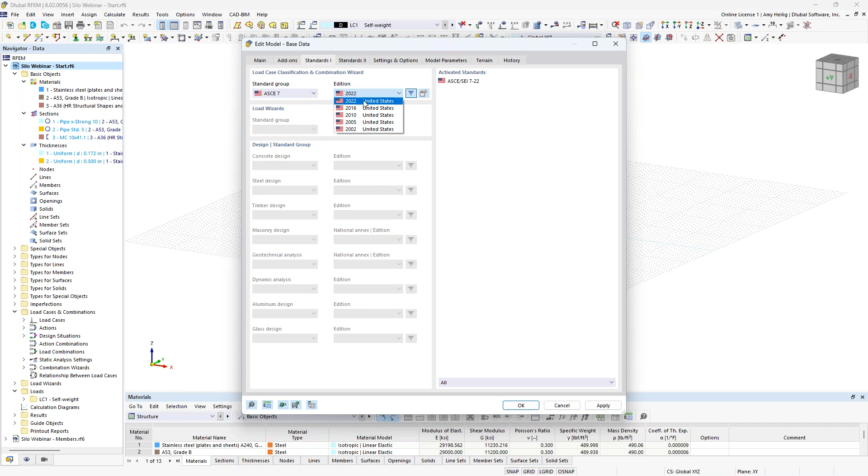Now, I will be generating the load combinations automatically according to the ASCE 7. You do see here many other international standards available, and we have implemented the 2022 for our load combinations. So we'll go ahead and implement that latest version there, again, for today's load combinations. So once this information is defined, you'll be brought into the main program here.

And I've taken the liberty for the sake of time to define some various materials such as stainless steel, A240, grade 304, we have A53, A36, and these all just come from our material library within RFEM itself. Also some various cross sections such as some pipe shapes, MC shapes, directly from the AISC database, and then a couple of thicknesses that have already been defined, and these will come into play when we draw our surface elements.

So to begin, I'm going to modify the location of this drawing grid, and I can do so by right-clicking at the bottom of the page here under Grid to edit, and to simply modify the origin coordinates to 61 feet in height. So when I click OK, we'll notice that my drawing grid is now located at this elevation.

I'll start off by drawing a new circular line element. So I go ahead and select a new line, but I change the line type here to circle, where I can simply snap to that origin point. And then I can either snap to my drawing grid here, or I could directly type in the radius of 1.5 feet. I hit enter on my keyboard, and we have that initial line element generated.

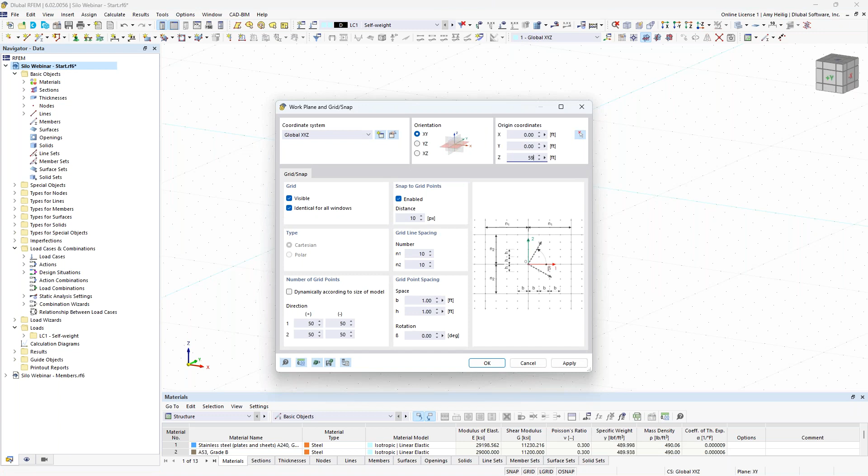I'm going to modify my grid elevation once again by editing it here, and we'll go ahead and set the elevation at 59.25 feet, and we hit enter. So now that grid is just sitting slightly below that line element that we just created with that circle.

I will create a new line. This time the line type will stay as a single line where I snap to that circle point, and then I'm going to also snap to my second point down here on the drawing grid at 7, 0, 59.25. I right-click to exit this dialog box, and we're going to go ahead and create a couple nodes.

So we can do so right up here in our quick tools up at the top to generate a new node. Now I could either snap to a point again on my drawing grid, or I could input in the coordinates directly at 7.17, 0, and 59.17. I hit enter on my keyboard, and we see that first node generated here off to the right.

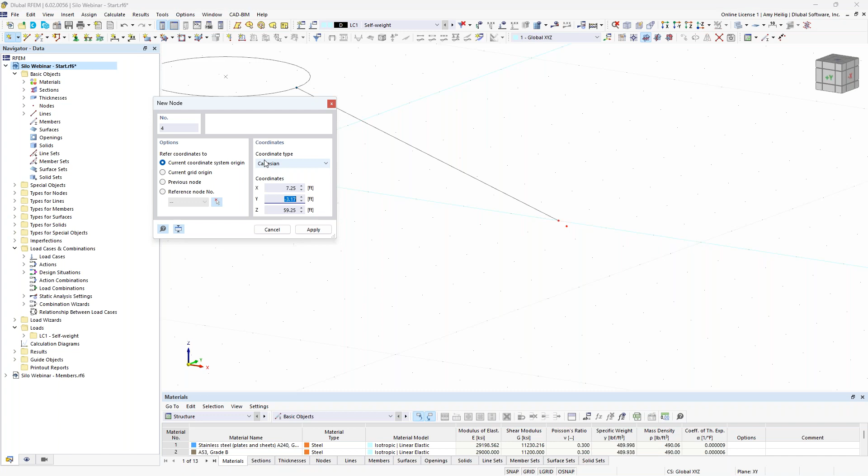I'll go ahead and create a second node at 7.25, 0, and 59.25 feet in elevation. I hit enter and right click out of this dialog box. This is going to form the curvature of our roof surfaces here for our silo.

We need to connect these nodes with another line element, but this time the line type will be arc. With this line type selected, we simply choose these 3 nodes in order. We right click and now that line is complete.

I'm going to take both the straight line and the arc line and select them with my selection box shown here graphically. We want to take advantage of our copy rotate tool. I'm going to create 2 copies here at 180 degrees, and we'll rotate about the center origin point 0, 0, 0.

Under the numbering and options, we can take this further by activating step links. This brings up a new tab in this dialog box where I can generate surfaces between my copied lines. When we do this, we can create a new template.

In the new template options, we simply assign a thickness and a material to those surfaces that will be generated. So utilizing the thickness I've already defined in this model at 0.172 inches within my dropdown, we'll assign it the stainless steel material as well.

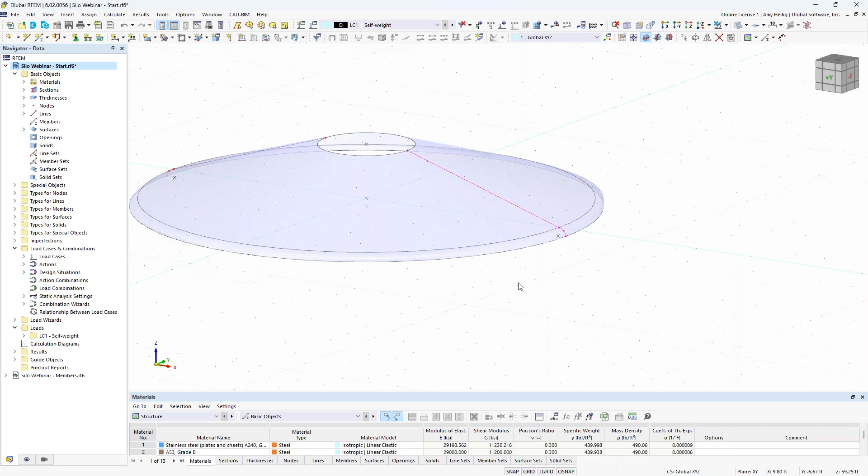When I click OK, I change the link type to arc. I click OK once again, and now we see those surfaces generated for our roof structure.

Now that those have been generated, we have our opening up here at the top. I'm going to hold down my control key to select both of these line elements, and if we right click under these menu options, we have the ability to extrude the line into a surface.

This is certainly a time-saving option rather than manually creating this surface, as we can take the existing line and extrude it 1 foot in the vertical positive Z direction, based on those global axes here.

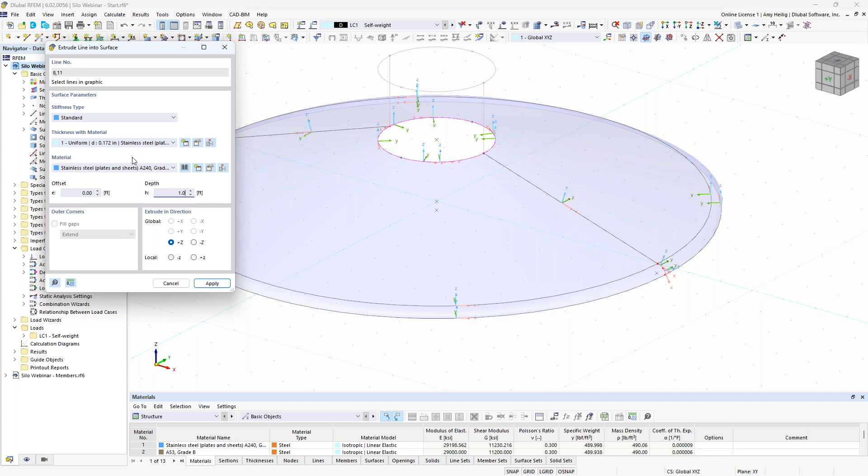Once again, we want to assign a thickness and a material to this newly generated surface. We could certainly create a new thickness here, or open up our material library to assign a new material, but these have already been defined in our model at 0.172 inches and stainless steel. We click apply, and now we see that surface generated here.

This is fairly straightforward for the opening at the top, but what if we'd like to add an additional opening to this more complex curved quadrangle surface here? We have opening options up here in our quick tools, but the problem is these openings must be applied to surfaces which are all in one plane, and we don't have that with the curvature of our roof here with this individual surface. So how can we add an opening to it?

I'm going to go ahead and move this to a plan view here graphically, so now we're just looking down at the top of these surface elements. I'm going to again create a new line element with the line type set to circle.

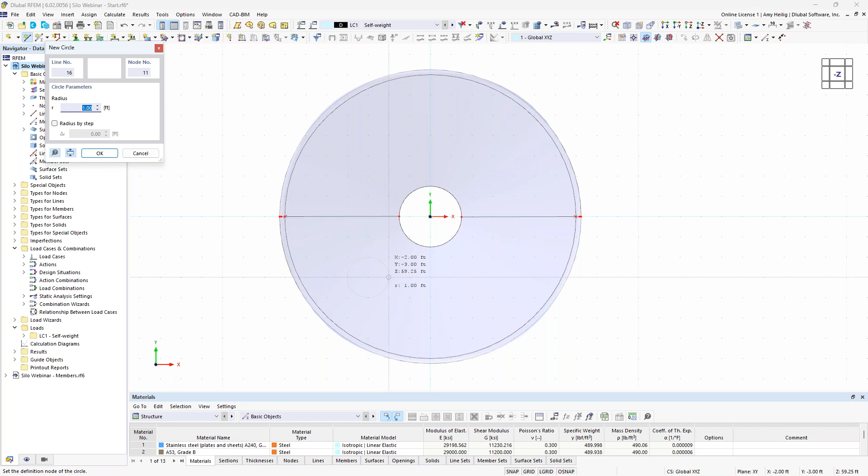And then we would snap to our drawing grid where we would like to place this opening, and I'll go ahead and create my second click here to define the radius of that circle. This is nothing more than a line element that's lying at the same plane as my drawing grid.

What we do now is right click on this line and yet again extrude the line into a surface. This time we'll keep the height at 1 foot in the positive Z direction. We assign the thickness, we assign the material, and we click apply.

Now we have this surface passing up through this curved quadrangle surface. Holding down my control key, I want to select both of these elements that are now intersecting. We right click, and under the right click options, we have the ability to create an intersection between these surfaces. But new within RFEM 6, we can automatically create that opening as well where the intersection takes place.

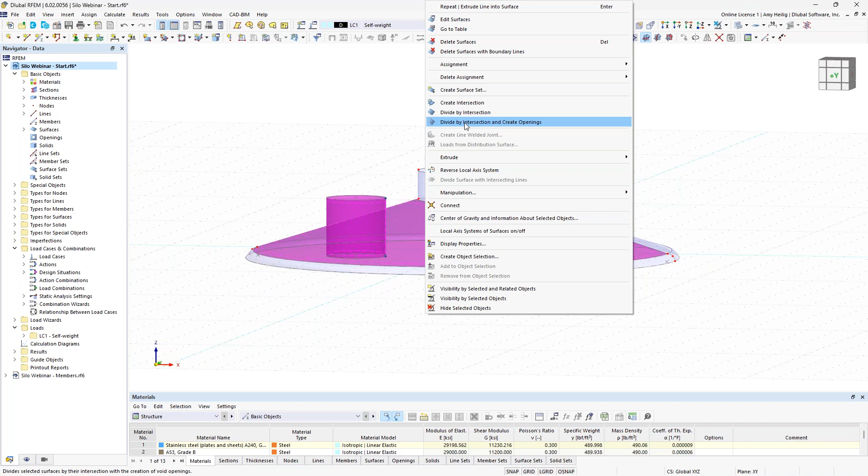So we select that option and automatically see the opening generated here within our curved surface. The program also broke apart this vertical surface into 2 various parts. So if we'd like to delete everything below the curved quadrangle, we can turn this to wireframe view, and I can graphically use my selection options here and simply hit delete on my keyboard.

So now what we're left with is the vertical surface here, the opening, and everything looks as it should be. So now that we're done with the roof surfaces, we want to go ahead and generate the silo walls.

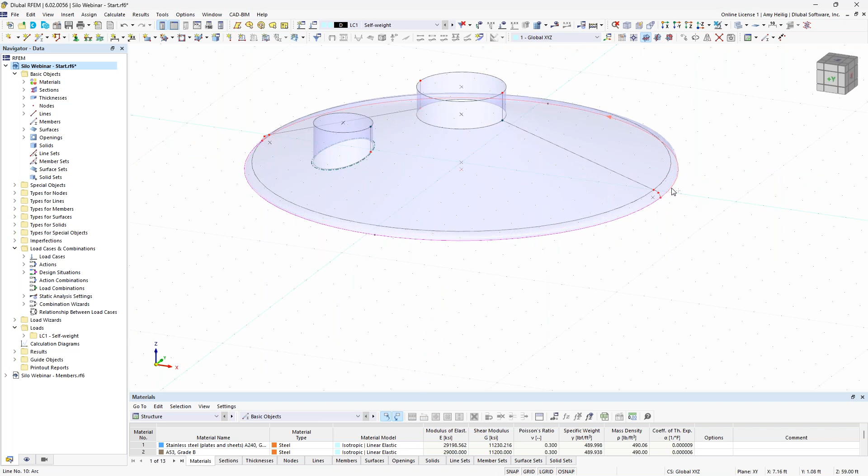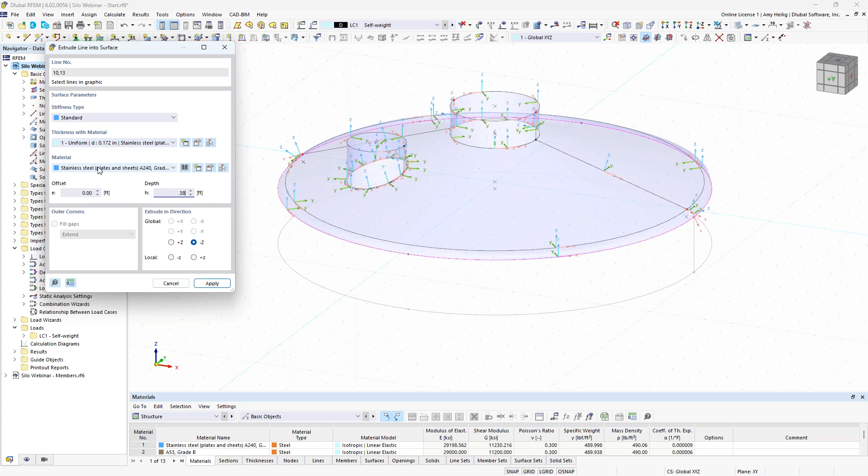I will hold down my control key to select both the front line and the rear line at the base of the roof elements, and we right click to extrude the line into a surface. Rather than extruding into the positive z-axis, we want to modify this to the negative z-axis, and we're going to give it a height of 38 feet. Once again, we assign the thickness and material. I'm going to keep this the same as all the other surfaces so far, and hit apply. So now we start to see the silo walls begin to build here.

Now I'm going to create a couple transition points at the base of this structure and continue to increase the height of these silo walls. I'm going to modify this extrusion depth to 3.5 feet, and click graphically on these bottom two lines. I hit apply, and create one more transition point at 1.5 feet, again clicking on these bottom lines. I hit apply, and now our silo walls are complete. These transitions will make more sense as we continue to model.

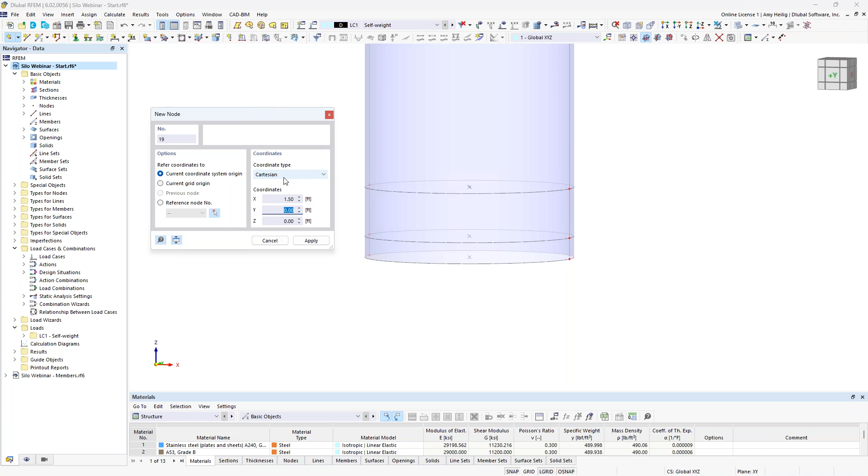So we're now done with the majority of the silo structure itself, other than the hopper. We want to create a new node, so we go up here to draw a new node, and I can directly input the coordinate points of 1.5, 0, and 5.5. I hit enter, and we should see a node generated down here at the bottom. Now I right click to exit, and we want to draw in a new straight line element, similar to before with just a single line. I'm going to snap to the second point here on my silo walls down to this newly generated node, and right click to exit a couple times.

I'm going to highlight this single straight line element and take advantage again of the copy rotate tool. The program remembers I previously created two copies, 180 degrees. We're still going to take advantage of the step links here. If I wanted my hopper to have an increased thickness or a different material, we could set that information here, but I'm going to use the same information I've already defined. So when we copy and rotate those lines, we'll have those surfaces automatically generated here.

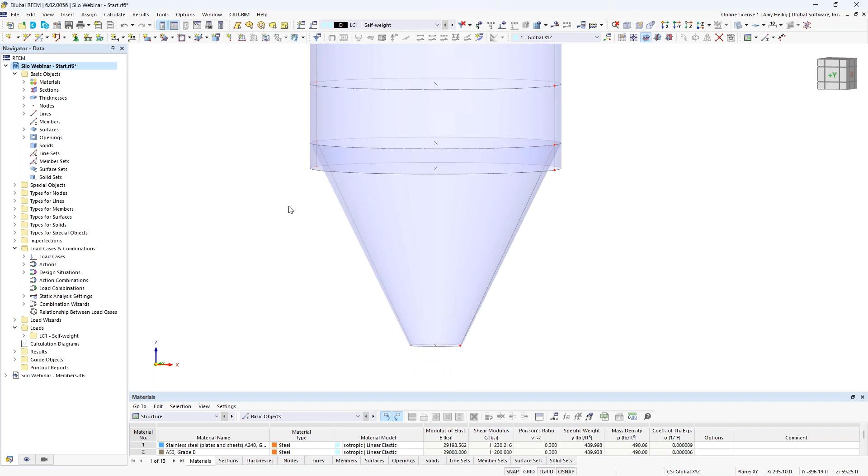Let us talk about the ring beams. Ring beams, in our case today, will be used to transition from these 1D steel members supporting the silo structure into the 2D surfaces here. But ring beams also act as wind girders for additional lateral stiffness, so it all just depends on the silo structure that we have. I'm going to create a user-defined visibility by first selecting this line element in the center.

Then I'm going to hold down my control key to select this additional line element at the bottom. I'm going to create a visibility by the selected objects, and highlight these two top line elements. When I right-click, under the options we have the ability for manipulation and several tools available, including parallel lines. This might be similar to what you see in AutoCAD, where we can simply input the offset distance such as 6 inches or 0.5 feet, and then offset it based on the line's local axes. We can see here currently it's set to negative y.

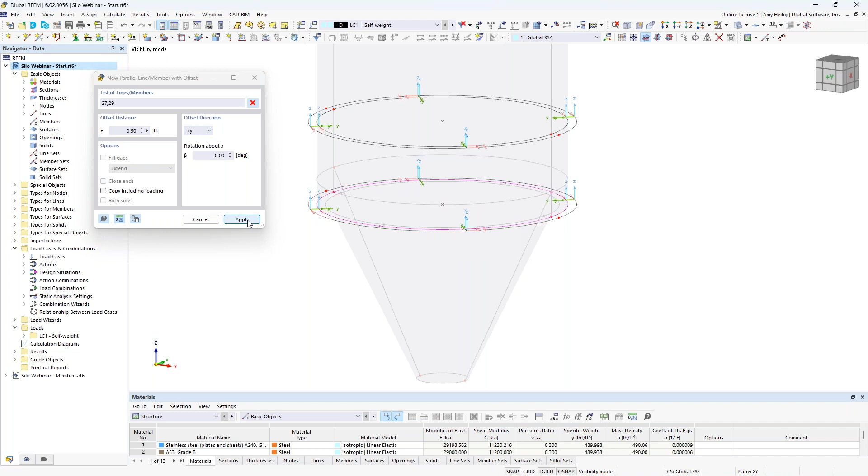So we're going to offset that 6 inches from the existing line's y axis in the negative direction. I hit apply, and do the same thing at the base line here. I hit apply, and then I'd like to create one more offset in the opposite direction at the base of these wall elements, so I modify this offset direction to positive y instead, and graphically click on those lines. Hit apply, and right click to exit out. Now we have the existing boundary lines, which will be used for those ring beam surfaces.

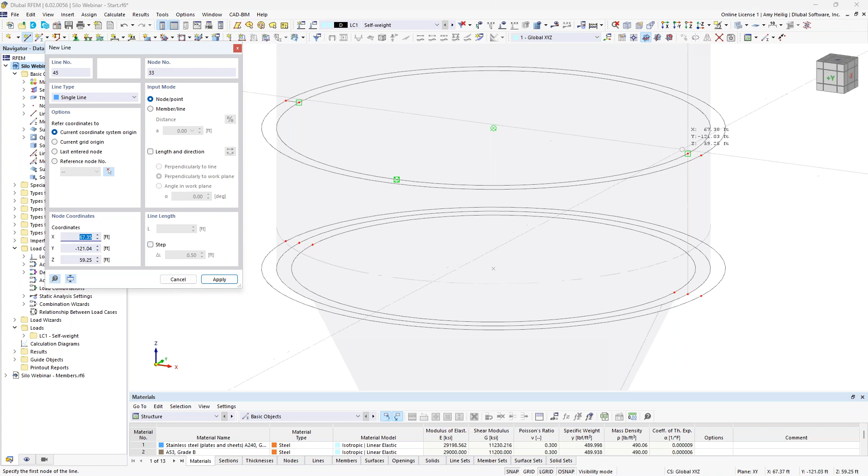I want to connect these nodes with a new line element, so we go back to the general single line. I will click on the left node, then the right node, and right click once to exit. I'll do the same thing on the right hand side, and then create a single continuous line at the lower left and also at the lower right.

So now that these boundary lines are created, we need to actually define the surfaces here that will make up that ring beam. So we can create a new surface type up here in my drop down, but we'll choose the option select boundary lines.

Because those boundary lines already exist, we can just simply put in the thickness, but this time for my ring beam, I'm going to increase the thickness to 0.5 inches. That's already defined here within my model, but we could create a new thickness directly within this dialog box as well. The material, perhaps we could modify this to A36, again available here in my dropdown.

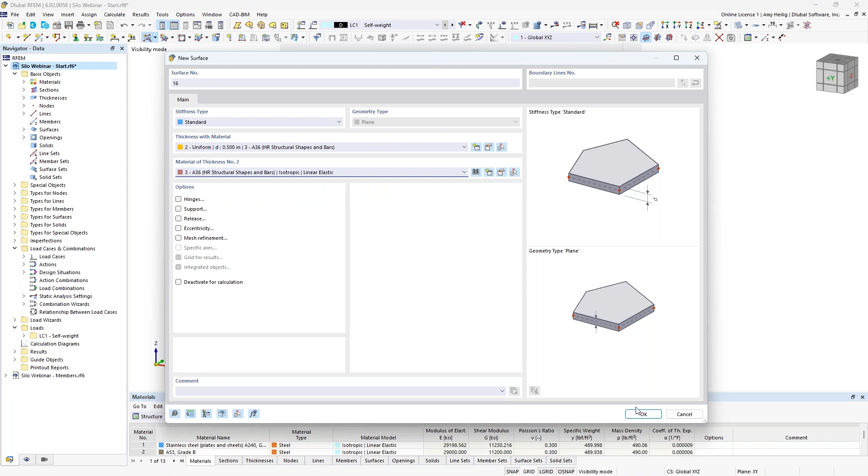I click OK, and then what I need to do next is to select the boundary lines. So I'll select the 4 boundary lines to create the first half of that ring beam, and then we'll do the exact same workflow here for the back side of that ring beam.

Same concept down here for our lower ring beam, but this time the boundary lines will be a little bit larger. And then we'll go ahead and do the same thing at the rear of the structure. So once we close those boundary lines, those surfaces are now generated and we can right click to exit.

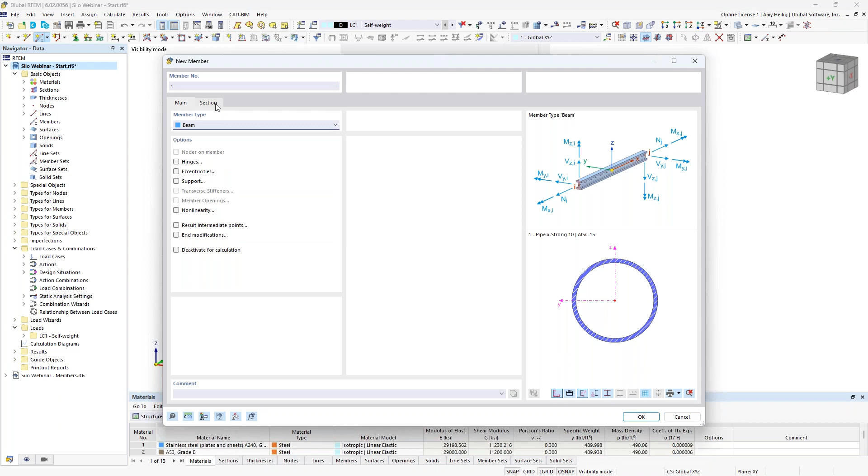So what we'd like to do now is to generate the members here that are supporting the structure down to the foundation. And we would normally do so by drawing a new single member, setting the member type here under the second tab, defining the cross section, and defining the material. But for the sake of time, I went ahead and have done this workflow in an already saved model.

So we'll go ahead and jump to this already saved model where all of these members have already been defined. So let us just take a quick review of what exactly the member types are, as well as the cross sections.

Under our navigator options, and specifically the second tab for our display properties, I can scroll all the way to the bottom to take a look at the colors shown here graphically, and I could change these based on the member cross section.

So what this is showing me now are the various cross sections that I have defined. You'll notice for these main columns here, these have been defined as a pipe extra strong, 10-inch diameter, A53 grade B material. Now we have some smaller pipe elements here for our lateral stability as well as their horizontal members.

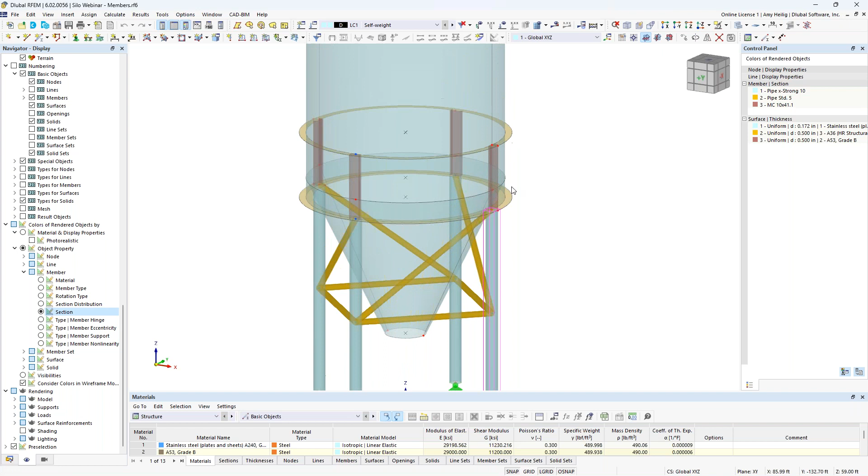These are just standard pipes, 5 inches in diameter. And finally, up here at the top, spanning between the 2 ring beams, I have some MC shapes, again directly from the AISC database within the program. They're just providing additional stiffness here between the transition of my silo walls to my hopper.

So that covers the basic cross sections that are used, but I'm going to modify the view now to the member type. So now we have these various colors here based on the member type. And what I mean by this is if I double click on one of those main columns, you'll notice that the member type is set to beam.

So a beam is just anything that's a standard column or beam. By default, the member is considered fully fixed at either end unless we add in a hinge option here to release the moment, for example. But we'll leave everything fully fixed here.

We also have these purple members, and the purple diagonal members are set to the member type tension only. This means that these members can only take tension forces. The minute that they have a compression force, they'll be taken out of the calculation entirely. But because RFEM is a nonlinear analysis program, in a subsequent iteration, if tension forces are reintroduced, then we can also reactivate that member.

And finally, we have this green member in the back, which you'll notice is a different color than the rest of our columns. So what's interesting about this member is we actually just released it in RFEM 6, and it's of the member type surface model.

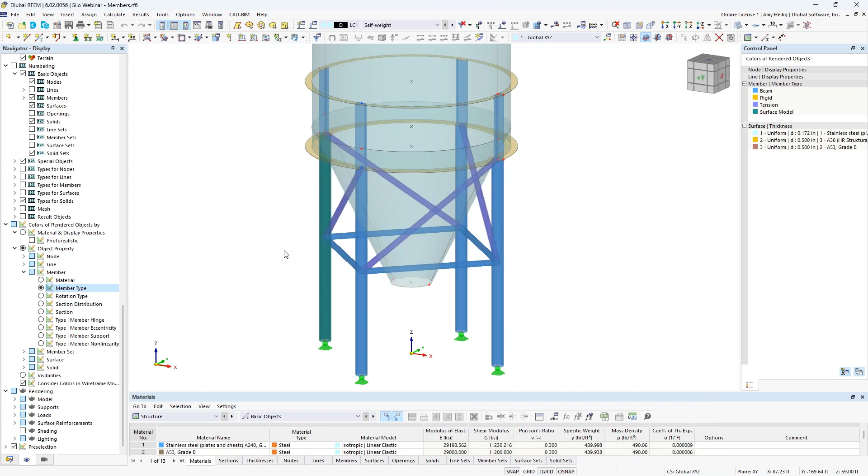Now, at first glance within this dialog box, it really doesn't seem too much different than a standard beam element. You'll notice under the section, we still define this as the extra strong pipe, A53 grade B material. But this will definitely come into play later on when we take a look at the FE mesh as well as our results. So I'll explain this member type in more detail as we go on, but just notice now it is slightly different than the rest of our column elements.

I also have placed in here some nodal supports at the base of our columns. These are just applied here directly within our quick tools.

Okay, so now that we have discussed the member modeling and have done a quick overview, let us talk about these surfaces and the importance of local axes orientation.

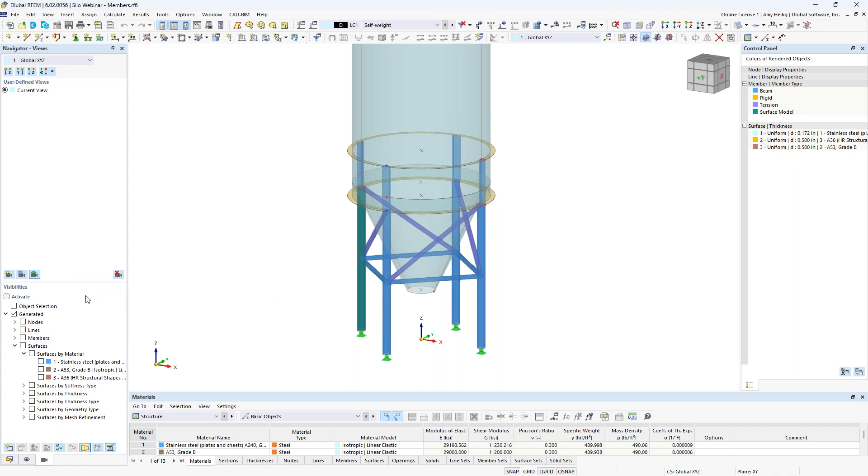In our navigator, we're going to jump to this third tab here, which allows me to turn on and off various elements within the model. I'll begin by turning on my surfaces, only the stainless steel surfaces, so everything else is hidden in the background. I'm going to right click to turn on the local axes of these surfaces.

If you notice, these local axes are right now oriented in various directions. They're certainly not all going in the same direction. This is a problem, and it's incredibly important when we're doing any FEA of surfaces that we ensure the local axes are oriented in the same direction, for a couple different reasons.

The first is for loading considerations. Much of the loading that will apply to this structure today is based on the local axes. For example, if we have the z-axis facing inward for some of these surfaces but facing outward for others, that's going to affect our ease of applying loads.

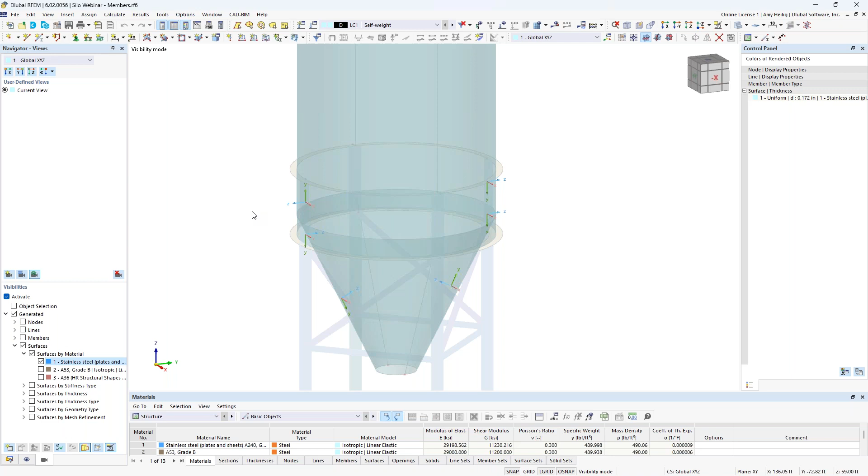The second issue is result interpretation. Information once we run the analysis, such as surface internal forces and stresses, is all based on local axes. Again, if we have adjacent surfaces with varying axes directions, then our results are also not going to make much sense. So let us begin with the local z-axes.

Currently, most of these surfaces here, with the exception of our hopper and this surface in the lower left, are all facing outward.

We can modify these by selecting them and holding down our control key, then right click to simply reverse the local axis system. Now you'll notice that the z-axis is facing out for all of our surfaces. So this is certainly a good start.

But the next problem is, if we take a look at these larger wall surfaces, we have the y-axis facing upward here on the left and facing downward here on the right. And the same goes for some of these other various surfaces.

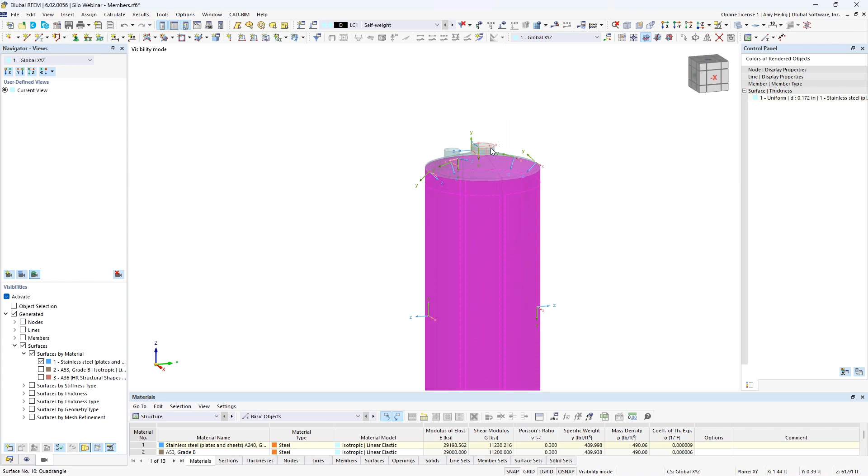So I'm actually going to highlight all of my vertical surfaces, including the hopper, as well as these surfaces up here at the top, by holding down my control key. Now I can easily double click on these surfaces to jump into the edit surface dialog box, and we want to turn on the specific axes option.

This brings up a new tab at the top of this dialog box called input axes, and under this dropdown we want to select the option axes parallel to lines. This allows me to tell the program to orient all selected surfaces and their y-axes parallel to a line that I can just arbitrarily choose within the model.

So I can graphically select any line back here within the model. We'll go ahead and turn on our visibility of our lines, and choose this line element here, number 49, for example. Notice when I hover over it, the red arrow is showing me the line orientation from bottom to top, because that will affect how we orient our local y-axes.

So I select this line number 49, I click OK through these dialog boxes, and now you'll notice that all of my local y-axes are now oriented in the vertical direction. So this takes care of those vertical surfaces, but we need to address the roof surfaces here as well.

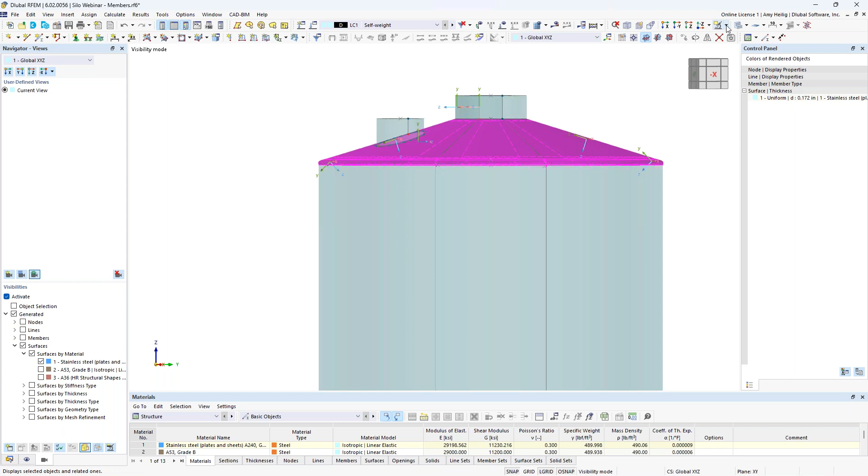So I will select the smaller surfaces that define that curvature, as well as my two quadrangle surfaces. I'm going to create a visibility by the selected objects, and you'll notice the first problem we have is all the z-axes are facing inward.

So we select all of these elements here, we can right click, and under our surface option we have the ability to reverse the local axis system. Now all these z-axes are pointing outward, similar to the rest of the surfaces within the model.

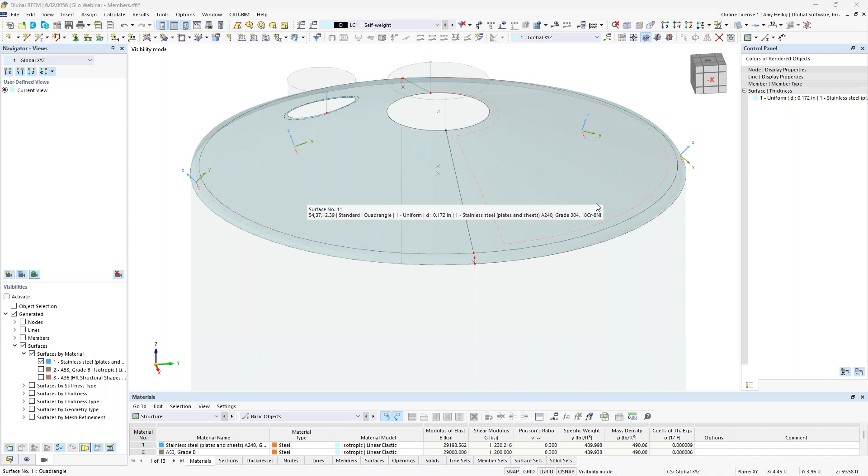The next problem though is the y-axes. So for these, I'm actually going to select all of them, double click, and once again under the specific axes and input axes options, I'm going to use my dropdown to choose the option axes directed to point.

So I can tell the program, instead of setting these parallel to a line, I'm going to set the local axes, the local y-axes, directed to a point that is passing up through the center of my silo structure. So I can graphically choose this axis that I would like to point these local y-axes to my surfaces. Sorry, I can directly choose the coordinate points is what I mean.

Or I can just simply type in some type of arbitrary vector. So 0, 0, 0 and 0, 0, 1 is enough to orient those y-axes towards the center of the structure. This way, when I click OK, you'll notice now that each y-axis is pointing right here towards that center point.

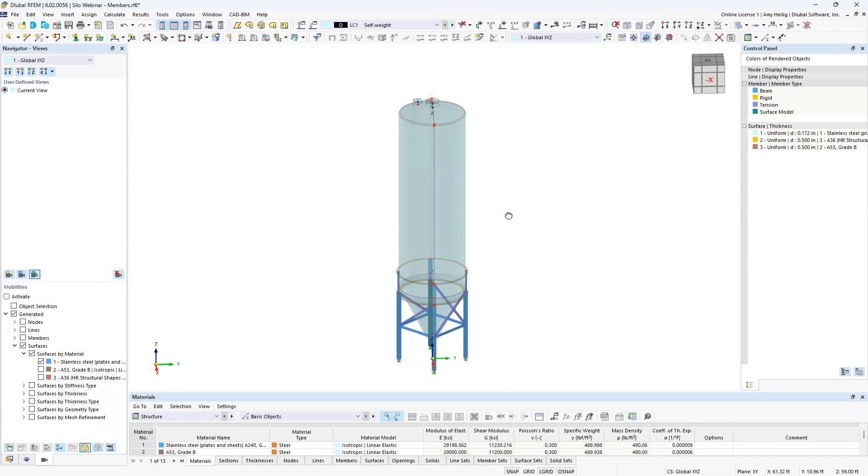Okay, so now that we have modified all of the local axes systems, we can go ahead and cancel our visibility mode. And the next thing we'd like to talk about before running an analysis is our FE mesh. So if we go to calculate mesh settings, we will see here our target length for finite element. So this is our global mesh settings, and the default is set to 1 foot. If I click OK and apply, the program will go ahead and generate this mesh for me.

Now, under my navigator display options, it could be that your mesh is turned off. So all we need to do here is to turn that back on. I'll turn this to wireframe view, and you can see that the program has automatically meshed everything for us based on that 1 foot setting, including tying all the members into the mesh. Everything again is done automatically.

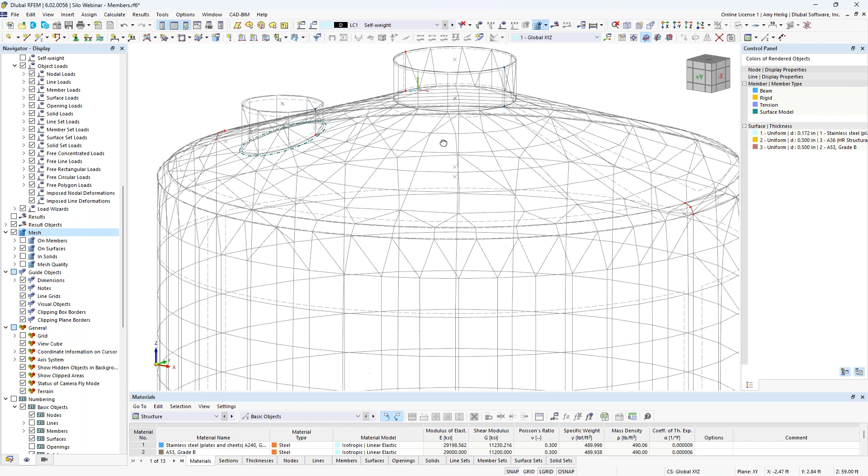But the problem is that this mesh is a little bit too coarse. For example, if we look at these smaller vertical surfaces here at the openings, there certainly are not enough FE mesh elements along the height, so we'd probably want to refine that further. One option is just to go back to the mesh settings here. We could certainly set this at a smaller value of 0.5 feet. We can hit OK and apply.

And now you'll notice that we have additional FE mesh elements. Looks a little bit more refined everywhere in the structure. Now, for my example today, I am going to keep this at the more coarse mesh size of 1.0 foot, and that's just simply to get a quicker calculation. But for your own projects, you certainly would want to refine that further.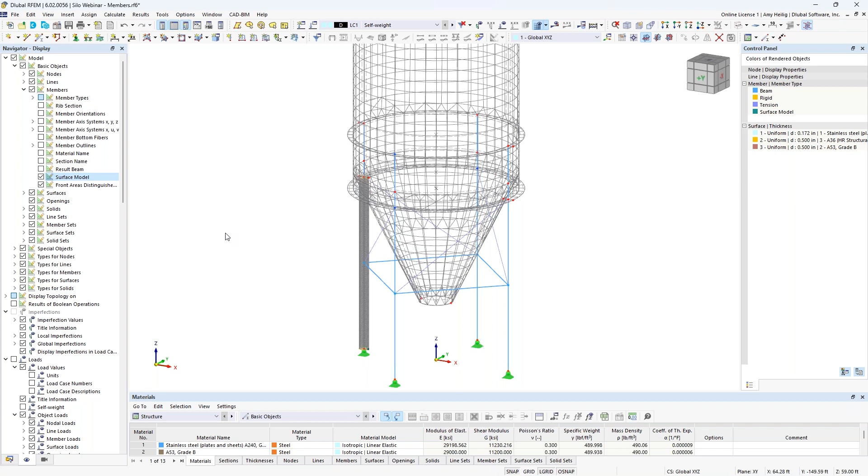Now, remember back to this special member type here, surface model, and that it's a different member type than the rest of our columns. Well, we'll actually be able to see that now if I scroll up to my navigator display options to the top under the members tree, we have here a checkbox for surface model. So when I turn this on, notice that we have an FE mesh generated for this column element.

So what's happening here is that the program has created the 1D member element, as we see with the rest of the columns, that we can move forward with the AISC design and the steel design add-on a little bit later on, but it's also creating a secondary element here for the surface. And this surface will allow me to perform a more in-depth stress analysis and design, for example.

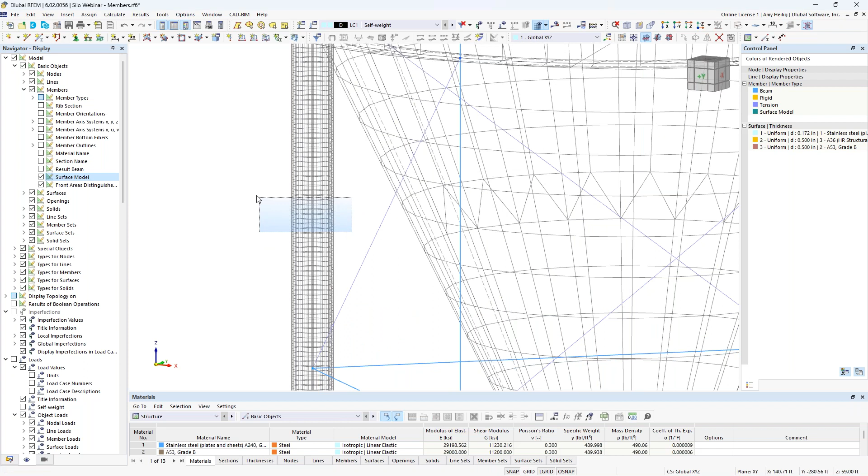You'll also notice that the FE mesh is much more refined than the rest of the structure. So if I go ahead and highlight this surface and take a look at the dialog box here, the mesh refinement is activated for this specific surface. And under the mesh refinement, we can see here that the program has automatically detected that we're going to have to set a smaller mesh size of 0.1 feet, but I can always adjust that if I'd like.

And then it will transition into the rest of the surface elements, which have a global mesh setting of 1 foot. So you can certainly apply mesh refinements about nodes, about lines, about specific surfaces, as we see here. You're not confined to only the global mesh settings. But this is an important feature, again, of this surface model member type that we'll take a look at our results once we are able to run that analysis. But just keep that in mind. That's what's going on underneath the hood.

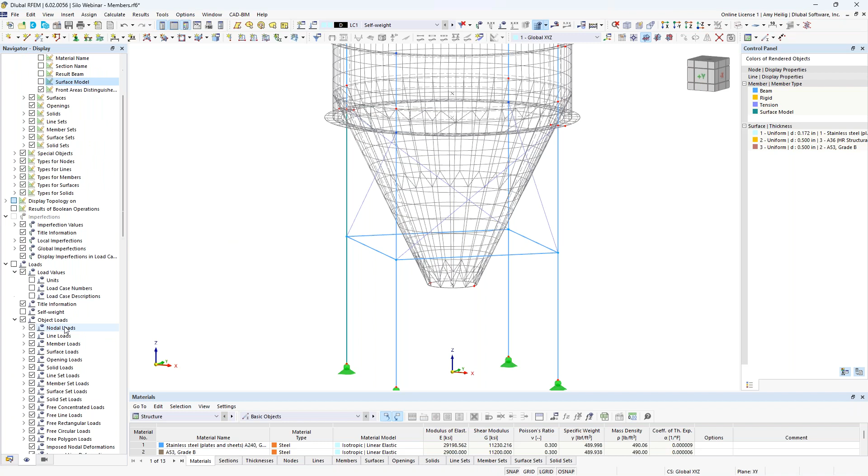Okay, so we're now ready to move on to loading. So I'll go ahead and deactivate the mesh here. And if we go into our load cases and combinations dialog box, remember under the base data, we are generating our load combinations automatically to the ASCE 7, the 2022 standard. The combination wizard, when this is checked on, the program will automatically generate our load combinations referring to the standard. Alternatively, I can just uncheck this if I'd like to manually create my load combinations instead.

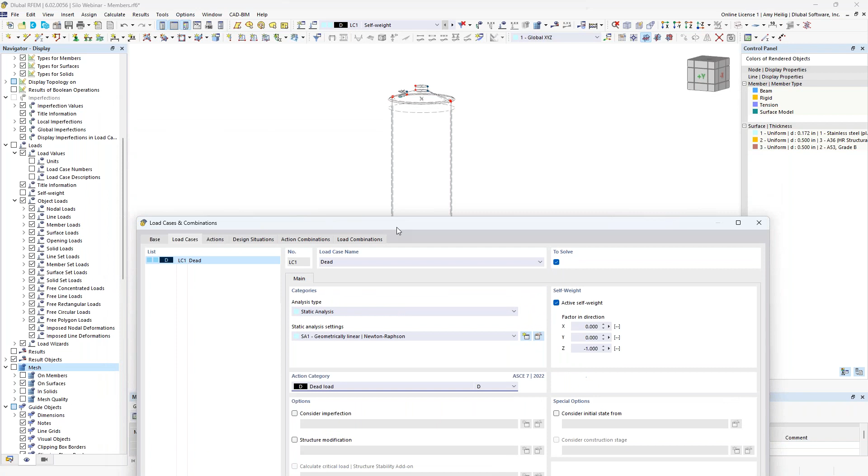Under our load cases, the program creates our first default load case called self-weight. If we'd like, we could rename this one to dead load. We would want to assign the action category here to dead load. This is specific to the ASCE 7, so the program knows which load factors to apply to which load cases. Now for my dead load case, I'm actually not going to apply any additional loads to our structure. We'll go ahead and leave that as self-weight only.

But I will create a second load case, and we're going to call this one pressure horizontal. And this is for our fill load that's going to go inside the silo that's going to create this outward pressure. Now the action category, if this was a fluid load, we could certainly set this to F. For today, I'm going to set this to live load. So now that I've generated this load case, I click OK, and I'm back here within the program, but notice load case 2 is selected within my drop-down box.

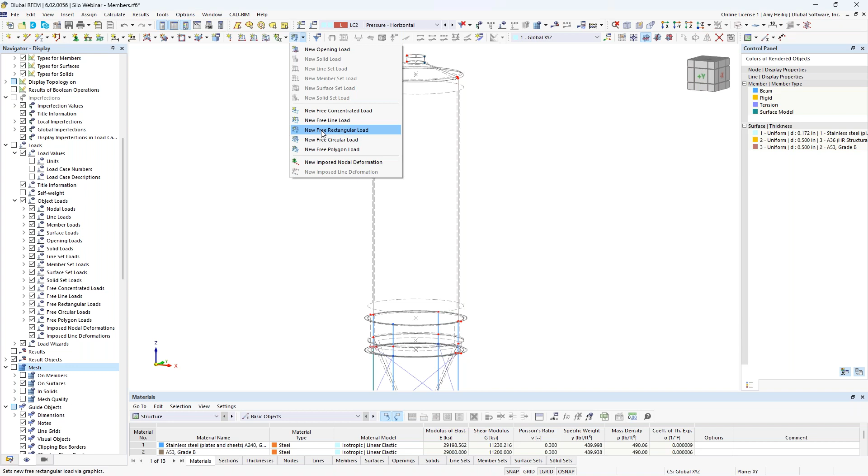Now with this fill load, I am going to assume that I'm not going to fill it up to the full height of the silo walls, up to the very top here, but rather we know this fill will be at a maximum a couple feet below the top of the surface. So I can't simply apply a simple surface load because that will apply it along the full height. So instead, we want to utilize what we call a new free rectangular load. And this just gives us a lot more flexibility with our structure loading.

Within this dialog box, the first thing we want to do is to specify the load projection, and this will be in the XZ plane. We also want to apply the load based on the surface's local Z axes. So again, this is why we oriented all of those local axes in the same direction, because this will make our lives much easier when it comes to loading. The load distribution is going to be linear in the Z direction. So what I mean by this is at the bottom of my silo, where most of that fill is sitting, we want to have a higher pressure of 2.5 kips per square foot. But at the top of the silo walls, we want to linearly transition to a magnitude of 0.

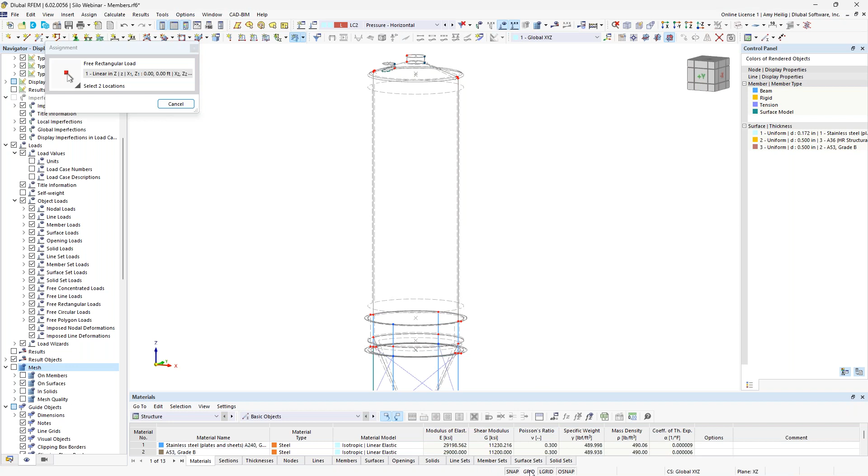So now that we have these load magnitudes defined, we need to actually tell the program where to apply the loads along the structure height. And I'm going to do so by graphically selecting 2 points here. Now, before I select my 2 points, I'm going to turn back on my drawing grid, and notice it's already arranged in the vertical direction here. But I'm going to snap that drawing grid origin right up here to the center of the structure. So we'll choose this point at the base of the silo wall. So if I rotate this around, just notice that that drawing grid is snapped right up to the front face. And I'm going to modify my view here in the Y direction.

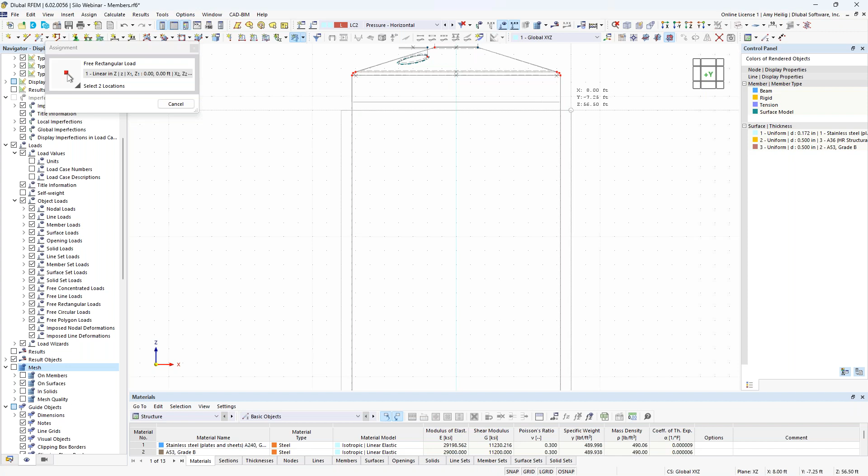So now when I'm applying this pressure fill here, I can choose a point at the base of my wall. And my second point will be to a height of 56.5 feet in elevation. Notice I'm not snapping to a point at the top of my wall element because I know my fill will not be that high. Then I'm going to graphically select the surfaces, the vertical wall surfaces here that I would like to apply this outward pressure. The surface numbers are generated here. I click OK through these dialog boxes, and now we can see that outward pressure applied to the structure.

Now we want to do the same thing down here for our hopper. However, for the hopper, we do want to apply the pressure from the bottom all the way to the top. So instead of using a free rectangular load, it's much easier just to choose a new surface load for this condition. The load type will be set to force. The load distribution will be yet again linear in the Z direction, and we want to apply this based on the surface's local Z axes. The load magnitude here will be set to 0 kips per square foot at the bottom of our hopper, but up at the top, we want to increase that pressure back to 2.5 kips per square foot.

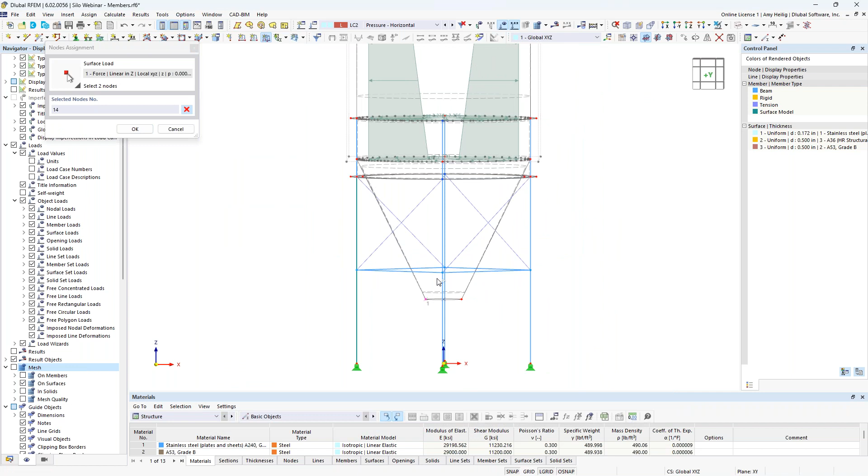Now the program is asking me to select some nodes here to define how this magnitude should vary along the surface height. So I'll simply select the bottom node here for the 0 pressure magnitude, and then my second node point will be at the top of the hopper where I'd like to increase it to 2.5 kips per square foot. I will graphically select here my 2 surfaces, number 8 and number 12. I click OK, and now we have this outward pressure.

If you find that the display of your surfaces is a little bit too big, we can always right-click here under Display Properties, and this will bring us directly to this specific loading under the Display Property controls, where I can modify the size here of 1 KSF to something much smaller. I click OK, and now we can right-click to use our slider options here to increase or decrease the size of this loading. But more or less, we have this outward pressure here at the hopper as well.

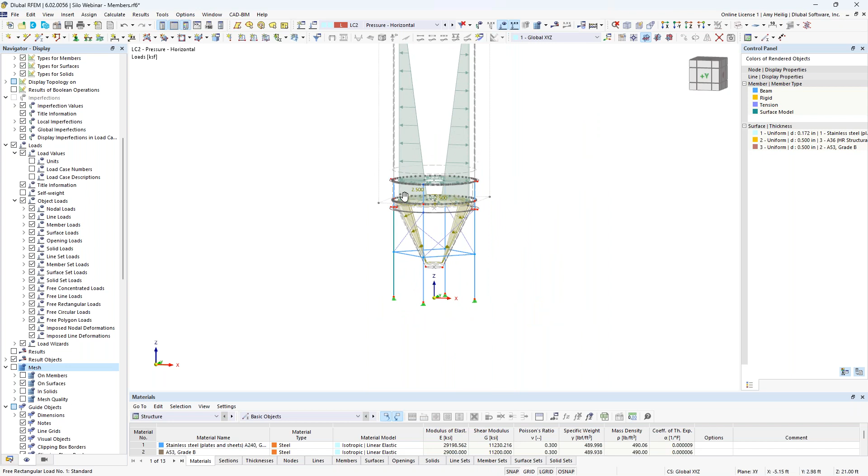So we want to move into our next load case to represent some type of friction load for our fill. We're going to go back to our load cases and combinations, but this time I want to take load case 2 and I'm going to make a direct copy of it. So I now have load case 3, and we'll rename this one to pressure vertical. And I'm going to click OK to come back into the model. But what you'll notice is that now I have load case 3 available to me. And by copying the existing load case 2, I've also copied those loads.

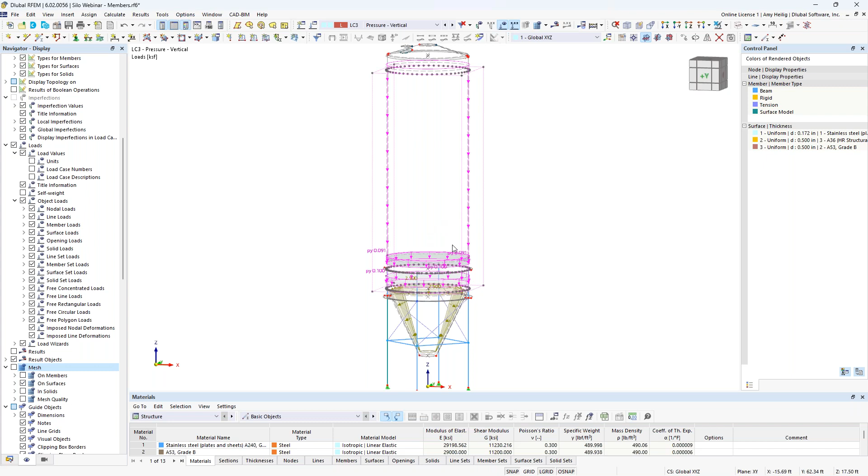So this allows me to double click on this free load. I can modify the load direction. Instead of based on the local Z axes, I'll modify it to the local Y axes. I'm going to also change the magnitude here to negative 0.1 kips per square foot. I click OK, and now that load is automatically modified here. So I don't need to redefine the free rectangular load.

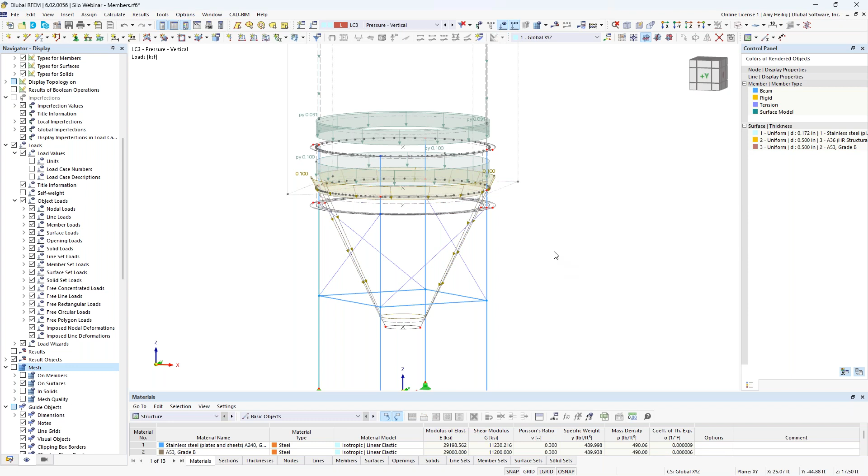I can do the same thing down here for my hopper surfaces. I'm just going to modify the load direction based on the local Y axes. I'm going to modify my load magnitude here to negative 0.1. I click OK, and now that load was also quickly modified. So there's certainly an advantage here of making a copy of that existing load case to not have to redefine those free rectangular loads and surface loads again.

Now, for our final load case, we will just generate a new load case rather than making a copy. And the wind load, this will be of the type wind with the load case name set as so. The action category will, of course, be set to wind load. So now that I have this fourth load case, what I'd like to do is refer here directly to the ASCE 7 2022. And in particular, I'm looking at figure 30.10-1.

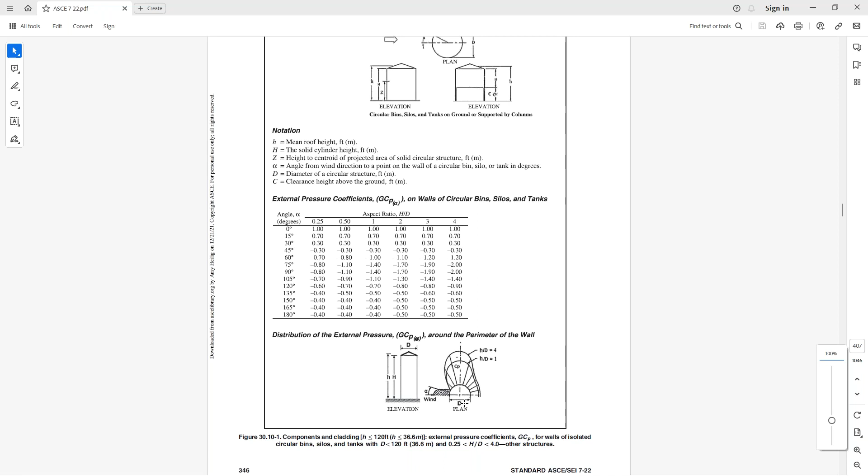So if we are designing our silo according to the components and cladding method for our wind loads, you'll notice here that we have a rather complex scenario where these wind loads will actually vary as we move around the circumference of the structure. Now, how we vary the magnitudes of the wind loads all depend on this table given here with the external pressure coefficients that are further dependent on the height to diameter ratio of our structure. So how do we apply such a complex loading as we see here in figure 30.10-1 and easily do this in RFEM?

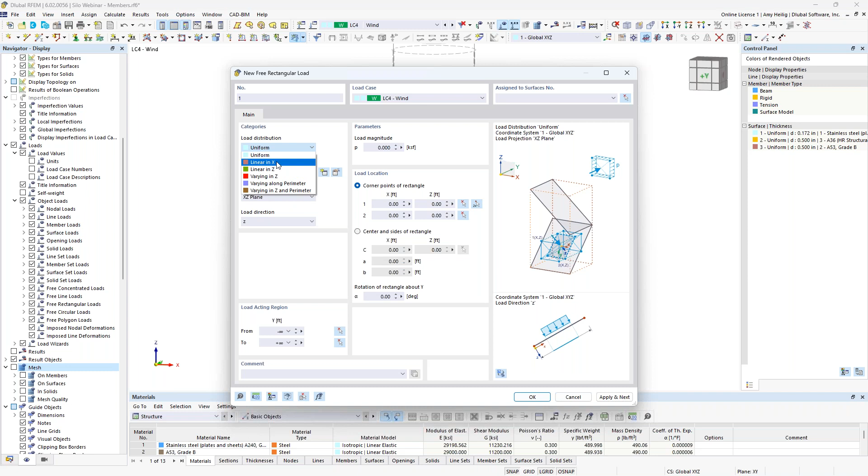So we'll go back to the program here, ensuring that we're under load case 4 for wind load. And I'm going to, again, apply a new free rectangular load. The load projection will be in the XZ plane again, and the load direction here will also be according to the local Z axis. So this is similar to what we saw with the load fill. The load distribution, though, will be varying along the perimeter. So notice how our picture updates over here on the right-hand side. Now we do need to give a starting load magnitude, and we're going to set this to negative 0.02 kips per square foot for our wind load.

But under our second tab, this is how we can tell the program to vary this wind load as we move around the circumference of the structure. The first thing to define is that center axis point. We previously saw something similar to this before with the local axis orientation. I can either graphically select these points here within the model, or I can just select a couple points that define that vector right up through the center of the structure at 0, 0, 0 and 0, 0, 1. This table down here is where I define in degrees how I'm going to vary that 20 pounds per square foot with a factor, again, as we move around the structure. So what I've done in this Excel file is to actually export out that table.

And then the table was initially empty. So under this column B, I've now put in increments of 15 degrees, starting at 0 all the way up to 360 degrees. I referenced figure 30.10-1 for my specific structure to determine what those external pressure coefficients should be. And I input them in here in column C.

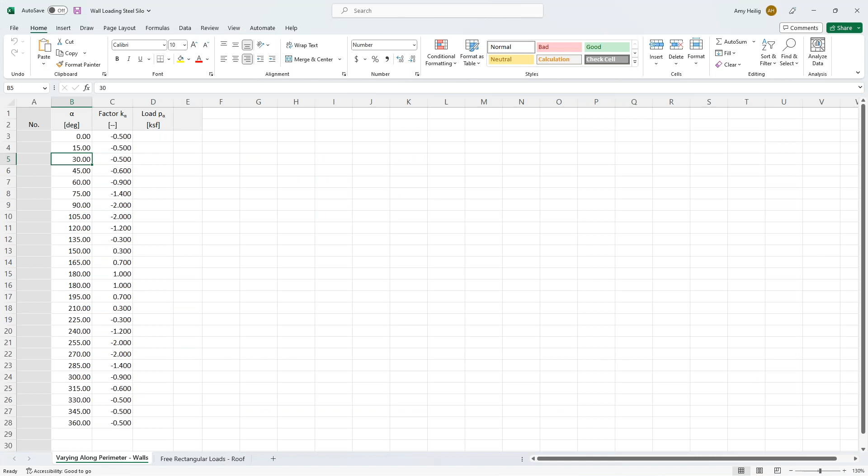So now back within RFEM, I have the ability to directly import in that Excel file with this button shown here. So the program will refer back to the open Excel file, and back in RFEM, we'll see all these values automatically imported, and the program will then calculate the load in this third column, again, varying as we move around the circumference.

So now that this information has been input back under the main tab, what we need to do is to assign the corner points of how this load should be applied to the structure. So I'll select my 2 points here, and I want to turn back on that drawing grid, and it should still be snapped here to the front face. So we'll modify our view based on the y-axis. Now this wind load will be applied from the base of my hopper all the way up to the very top here of my silo walls.

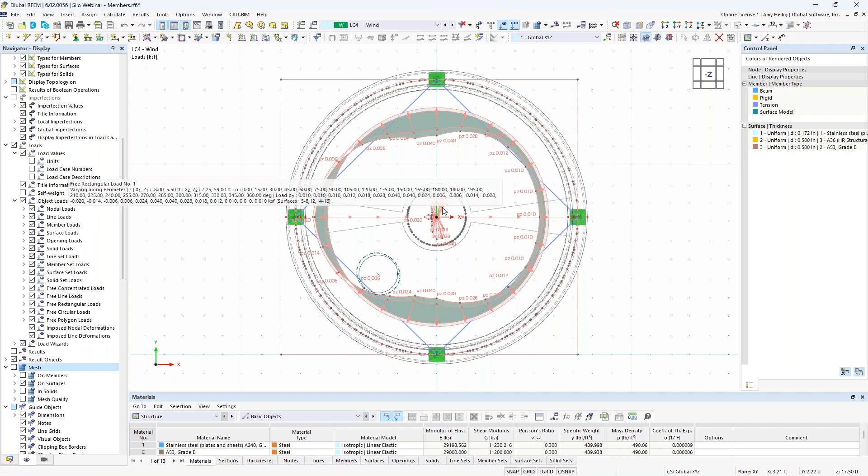So I've defined those corner points, and lastly, I need to define the vertical surfaces here that I would like to apply this wind load. So I can just use my selection box to select all of the surfaces shown here within my dialog box. I click OK, and now we see that outward pressure. I can take a look at the view here in the global Z direction. And again, this should reflect what we see within the ASCE 7 with my wind load flowing from left to right here based on the global X axis.

Now, realistically, we'd probably want to add additional wind load to our roof surfaces, to our members, but I think more or less you understand the concept now of loading. So we will go back to our load cases and combinations. Now that these load cases have been defined, the program will automatically create what we call design situations. And these design situations just simply group together all of our load combinations. So we have our first design situation, which is our factored load combinations. And we have our second ASD design situation, which will be our unfactored load combinations.

Now, for our example today, I'm not so interested in checking deflections and things like that for my silo. So I'm really just going to keep here my LRFD design situation and deactivate the ASD. The design situations will come into play a little bit later on within those design add-ons. And lastly, we have our load combinations here individually listed out based on the load cases that we've defined with the relevant load factors directly from the ASCE 7. And again, these all belong to this single design situation as noted under this previous tab.

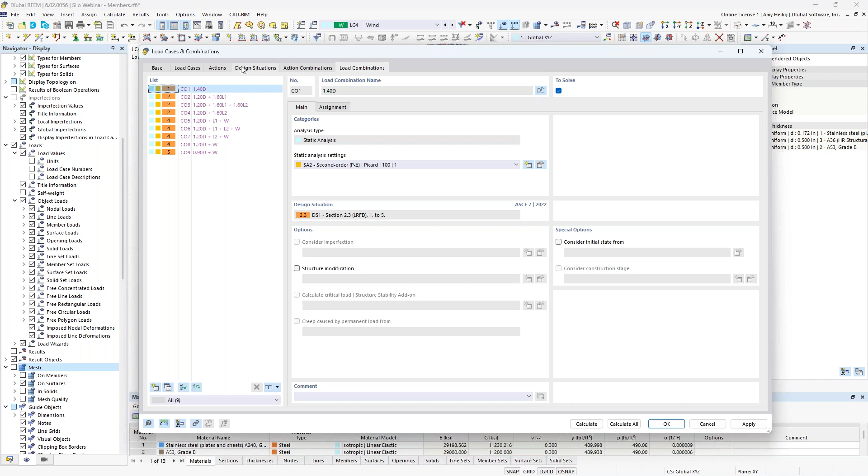So we can view these various load combinations here with all of the loads and applicable load factors applied graphically. And we can scroll through those here to see them again applied to the structure. So we'll now go to calculate all. And remember, RFEM is responsible for the analysis portion only. So what we're going to do now is to go ahead and solve each individual load case, but we're also solving for all of our load combinations listed here. And these load combinations are being solved according to a nonlinear second order analysis considering both big P delta and little p delta.

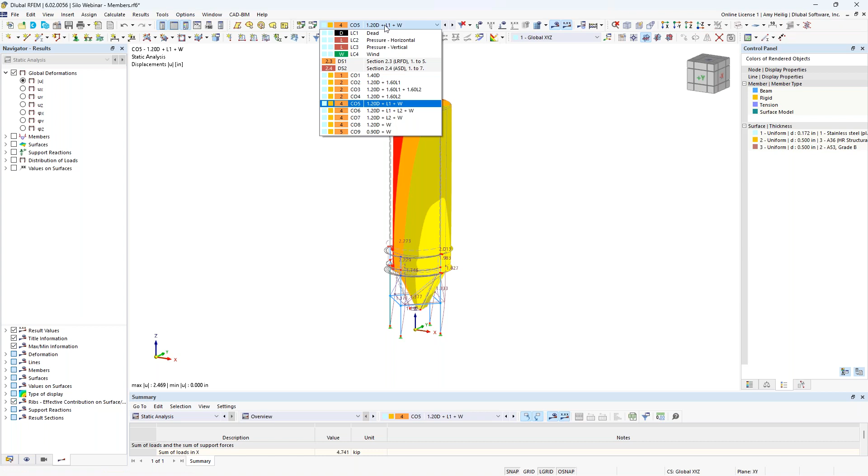And also notice that the program is taking advantage of the multi-core processor in your computer to solve these load combinations at once. But now that the calculation has finished, we are presented with a fourth tab here in our navigator for our results. And we're currently looking at the deformation of the structure under any one of these specific load combinations. If I'd like, I can modify my deformation of my members here to be colored cross sections down at the bottom, so that's a little bit more visible to you. So taking a look at the global deformations, we would just want to ensure that we see results here that match up with what we would expect under the applied loads.

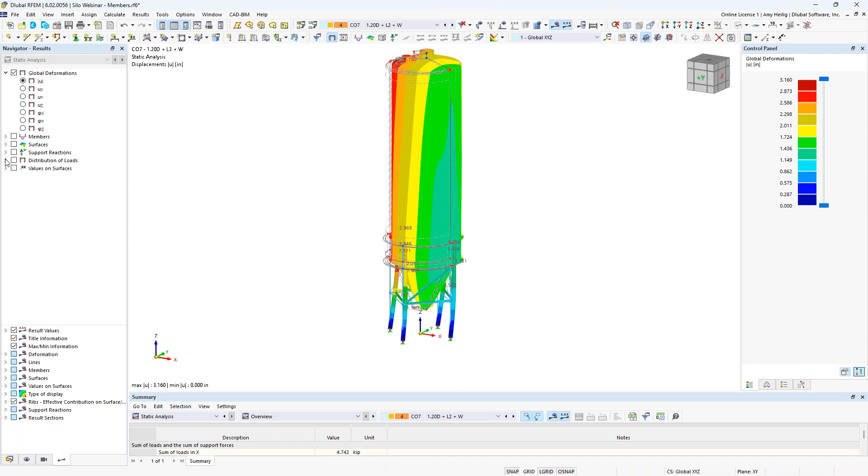And once we have taken just a brief overview of that, another way to check our load input is a nice feature in the results called distribution of loads. So I can back up a step to go to my wind load case. So this is the load case with only wind defined. And I'm going to set the display here based on the global x-axis.

Notice that I can now see how this wind load was distributed to my surface, again referring back to the ASCE 7, where we should see varying wind loads as we move around the circumference of the structure. At the front, we're going to see that 20 pounds per square foot, but as we move around, we'll see the varying magnitudes, including a pressure or a suction in the rear of the structure.

Same concept for that fill load, that horizontal fill load. If we'd want to modify this based on the local z-axis, we can take a look here, and we'll see at the base of our walls a value pretty close to 2.5 kips per square foot, but at the base of our hopper and at the top of our silo walls, we transition linearly to a magnitude of 0 kips per square foot. So again, just a nice feature to ensure that we've applied our loads accurately here.

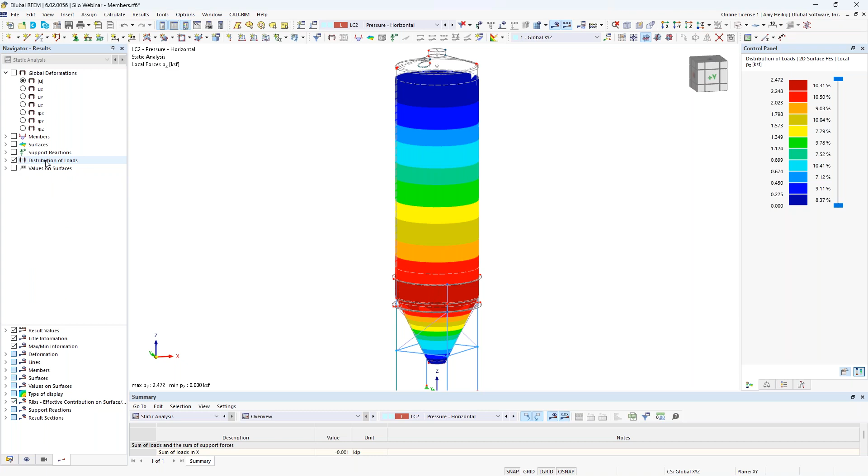Now, in addition to checking the distribution of loads, we're likely interested in our members. Within our members, we can turn on this option here within our results to view the axial forces. We can view our shear forces as well as bending moments in the strong axis, weak axis direction. For all members visible here, perhaps we'd like to change to these different load combinations and view our results here.

This information is also available in table format under the static analysis. We can go to results by members. We see here internal forces where we could export out to Microsoft Excel.

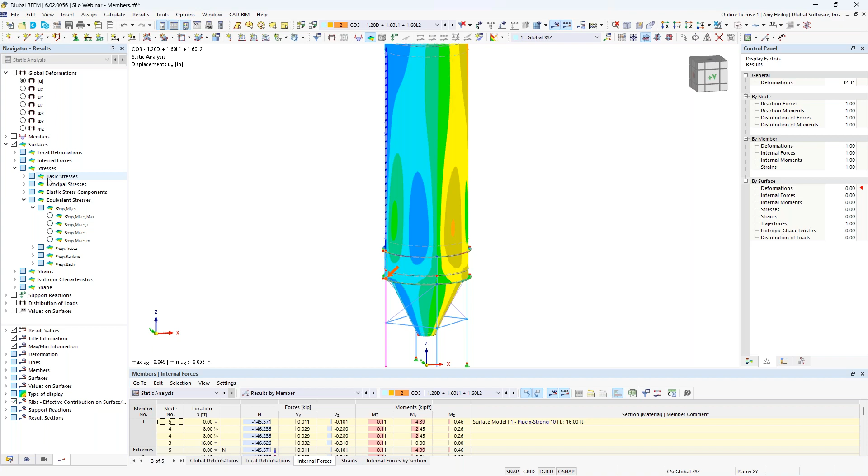Now jumping to the results of our surfaces. We'll go ahead and turn on our surface display here, and we could view internal forces, but I'm going to turn on my stresses, and in particular my von Mises stresses. So we currently see those von Mises stresses shown to us graphically here. But if you remember, we have this special member type that created that FEA underneath the hood in addition to the 1D member element.

Well, back under my navigator display options, if I turn back on that 2D surface and take a look at the visibility by selected objects, notice that we're getting stresses for that one-dimensional element because again, that 2D surface was also generated for that more in-depth stress design. So this might be very interesting for us, not only to view the internal forces in the members, but what are the stresses where it's framing into this ring beam. So keep that in mind, that's what's happening underneath the hood.

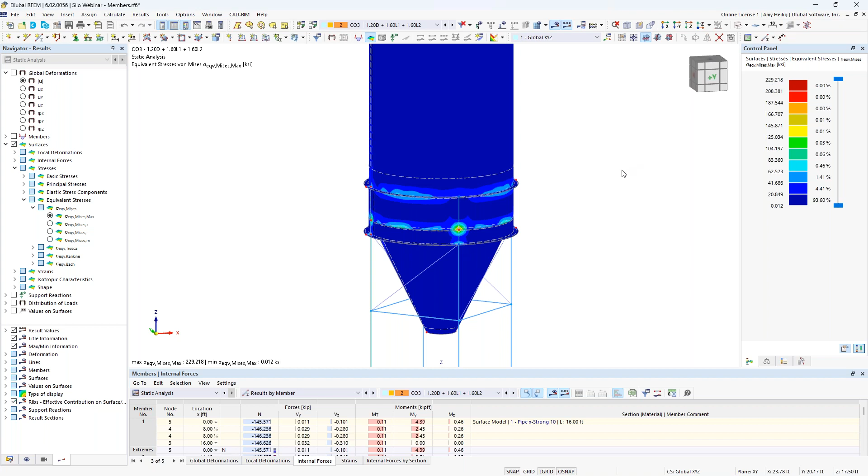We'll go ahead and exit out of this visibility mode back to the general display here of our silo surfaces. You'll notice that currently I'm looking at the von Mises stresses, and the highest stress under this particular load combination is 229 KSI. I think we're all in agreement that this is much too high, that likely the steel material will yield at a value much lower than this.

And if we take a look graphically here, we see that this is really a result of a singularity, essentially where we have all these high forces framing into this one single nodal point, when in reality we're going to have better load distribution. But here is a trick within the results interpretation.

When you are looking at stress analysis and design for 2D surfaces or 3D solids, it's highly recommended under the calculate result smoothing to change here the default option. So currently the program is using this smoothing algorithm to tie in all these values so that we have a nice view of the ISO lines and contour lines here back within the model.

But it would be better, again, if we're doing an in-depth stress analysis and design, to change this to constant on mesh elements. So the picture won't look as nice, but your values are going to be a bit more accurate. Notice that for every FE mesh element now, it will have its own value rather than trying to tie it together all within the single surface.

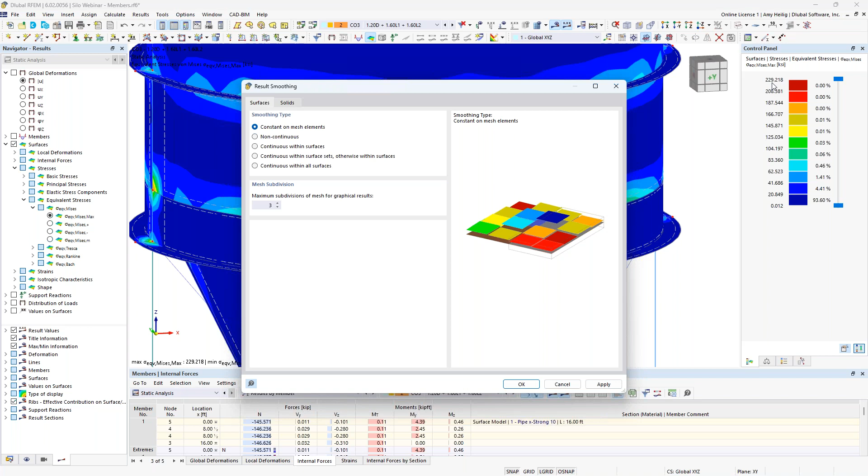So notice that my values were previously set at 229 KSI for this particular load combination. When I change this to constant on mesh elements, we dropped to 21 KSI. I mean, this is a very significant difference. So again, it's highly recommended to make that modification when we are doing this stress design.

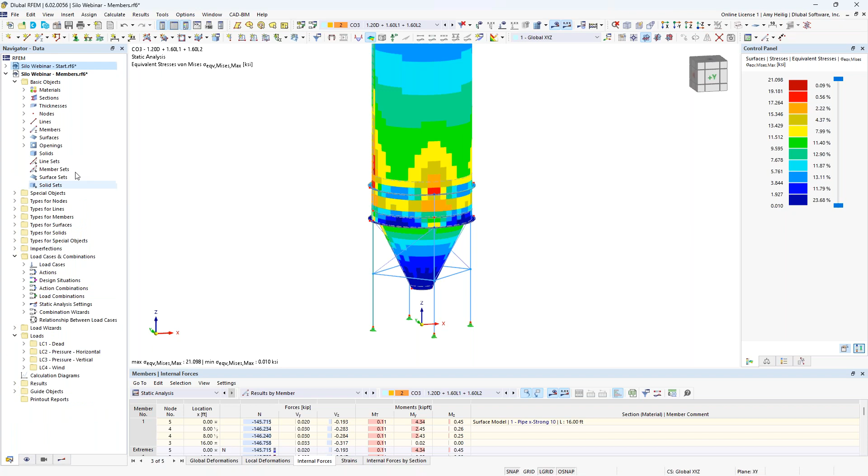Okay, so now that we have taken a look at our analysis results, let us move on to the design with those specific add-ons. I am going to go back to my navigator here, and I'll right click under the model name to launch the base data. If you remember at the beginning of the example, I showed you all of these various add-ons. Well, now we'll make the clear distinction that we're going to activate them. So everything you've seen up until this point has only been in the base program RFEM 6. We're going to launch the stress strain analysis, the steel design, as well as structure stability. I'll go through each one of these in that order to explain how we can perform the design on the structure.

So taking a look first at the stress strain analysis, I am going to highlight my entire structure, and I can double click on my surfaces here to go into the Edit Surfaces dialog box. You'll notice now that we've turned on that stress strain analysis add-on, we have an additional tab here.

And this is actually pretty straightforward. We have a configuration, and the program already has a default setting here that we can take a look at. So the program automatically suggests that we'd like to design these surfaces based on the normal stresses, which are turned on here. We have shear stress as well as von Mises stresses. We can turn on the other various stresses if we're interested in designing those as well. But we get a nice formula here along with the variables and variable definitions.

Now, in this second column, this is the limiting stress type. What this means is that the program needs that limit stress defined. So typically we're just going to refer directly to the material itself. For example, a 36 material would have a limiting value of 36 KSI for something like von Mises. And with these drop-down options, we can refer directly to the material, or we can set our own user-defined value if we'd like. Now, keep in mind, this add-on is completely code independent. Rather, we're just doing a general stress design specific to the material's capacity.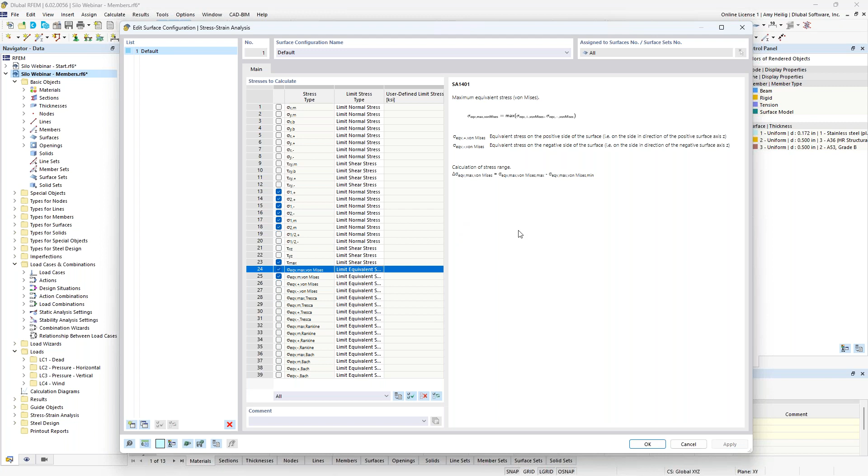So once we have adjusted these configurations and which stresses we're interested in, that's really it. We can click OK, and what we'll see down here in our table settings is a new option for the stress strain analysis add-on. Under design situations, remember I said that the design situations will come into play a little bit later on with the add-ons.

Well, here we have our factored design situation, which includes all of those factored load combinations, and this is automatically checked on here. We're not interested in our unfactored load combinations, so we deactivated that. The objects to analyze, we can do a general stress design of the members as well, but we're not interested in that today.

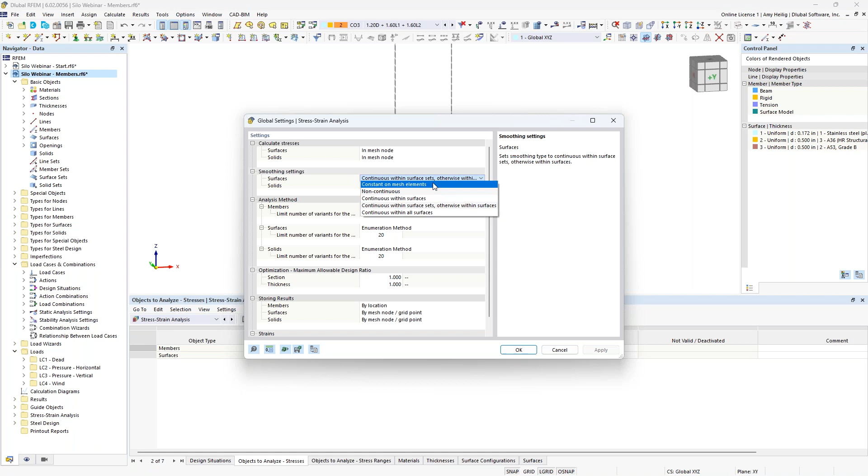We're only interested in doing the stress design of all the surfaces. Now, before I run the calculation, I want to make one more modification here in the global add-on settings. So this is somewhat independent of the base program RFEM 6, but more specific to the stress strain analysis add-on. And very similar to how we change the smoothing settings in RFEM 6, we need to do the exact same thing in this add-on. Otherwise, the program is going to refer to those extremely high stresses where it's trying to use that smoothing algorithm to tie the stresses together. So instead, we change this to constant on mesh elements.

I click OK, and now I am going to run the calculation directly within this table. So unfortunately, when we activated the add-ons, it did clear our results, and the program just made a quick note of that, and no problem. All we need to do here is to run back through these load combinations to determine the demand stresses. So what are the stresses on each one of these surfaces based on the applied loads?

So once that these have been determined here, as you can see, some of these are wrapping up, it brings in those stresses to the stress strain analysis add-on, compares it to the limiting stresses of the material itself, and ultimately what we're presented with is a stress design ratio. So we can view these stresses here on the surface under the stress strain analysis, and sure enough, we have our existing stresses, we have our limiting stresses based on the material, and then we have that general stress design ratio. So as I click through this various table, notice that that red arrow is pointing me directly to where that controlling stress is on the surface.

And if I'd like, I can also take a look at the result details. So these design check details here are just going to list out, again, the formula for the stresses, all of the stresses from the analysis, the limiting stresses, and ultimately how we calculate this stress design ratio. So trying to be, again, as transparent as possible of where that information is coming from.

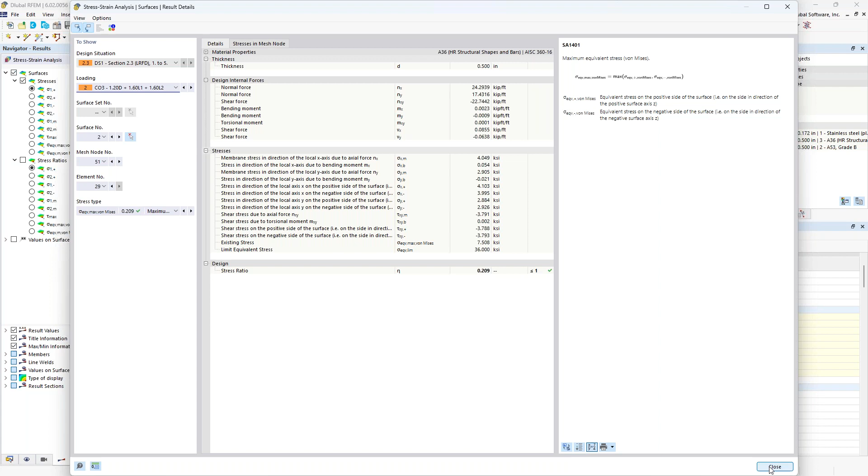So that's really it for the general surface design. You can see how this is a little bit more efficient rather than having to manually export out our stresses to something like Microsoft Excel to do that stress design by hand.

So we'll move on to the steel design quickly. Now, of course, there's not enough time today to go into detail for this, but I do have additional webinars that are devoted to each one of these add-ons that go through this workflow in much more detail. But for today, we're only interested in designing quickly these 4 column members.

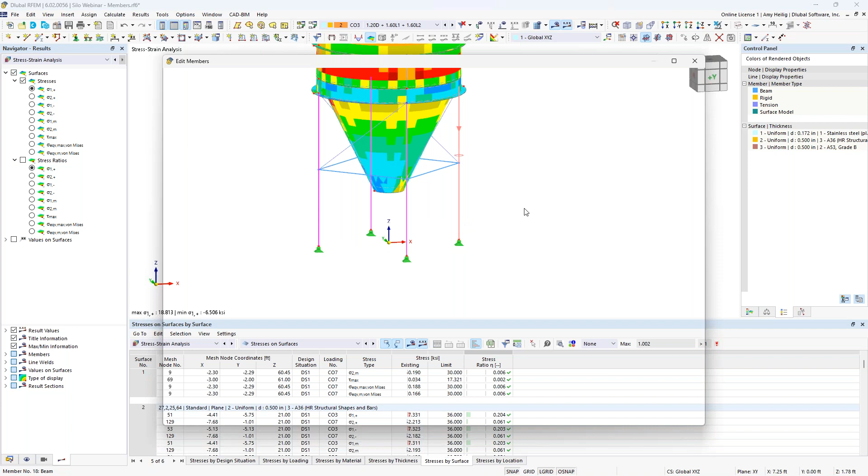If I double click on these 4 columns, we have all of these additional tabs available because we activated that steel design add-on. So the one thing we need to do before running our design according to the AISC is to define our unbraced lengths. And we do this under the design types, effective lengths. I create a new definition type here.

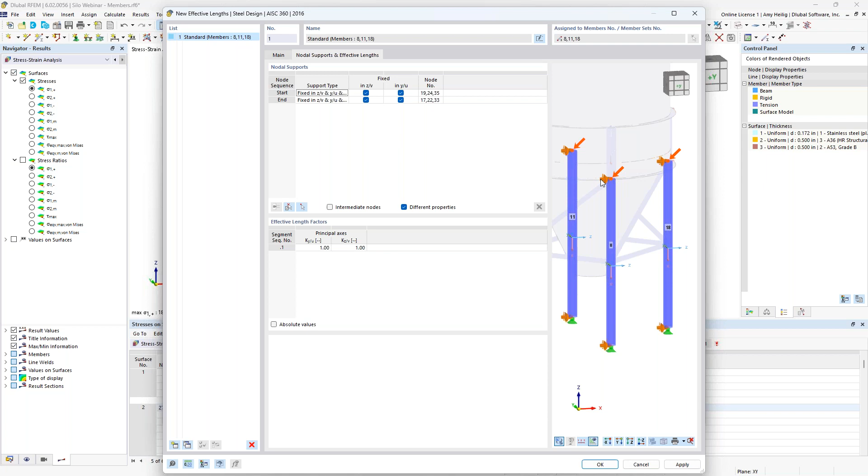So we can add in that intermediate node, go ahead and manually place in that intermediate restraint. Now the unbraced length will span between these intermediate nodes at 8 feet, or half the height of the full column. So now that this information is defined here, what we can do is drop down to the steel design add-on.

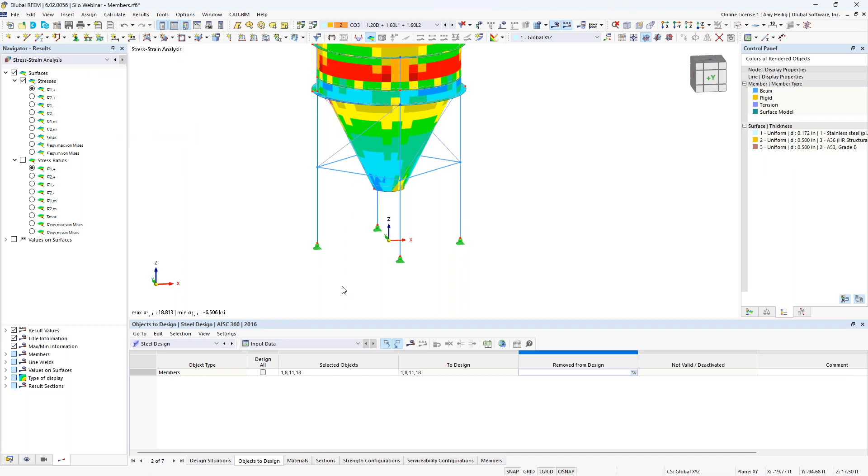Very similar workflow here that we saw with our surfaces. We have our LRFD design situation, and we set this to our LRFD strength limit state. Under the objects to design, I'm not going to design all members. Rather, I'm just going to graphically select my 4 vertical columns, and I can run my calculation.

Now I already have my internal forces, it brings it into this add-on. It applies the AISC equations to ultimately give me my design ratios for each one of these members. So again, notice within this table, everything is synced up graphically, and we have all of the various checks here directly from the AISC. For these various checks, we can take a look at our design check details.

We see here our code equations given to us. I can use my mouse wheel to scroll in to make this larger. We see the code equations line by line, the variables, the code references, ultimately how we're determining this design ratio. So again, just trying to not be a black box software, but to give you as much information so you can determine if you agree with how the program has calculated this design ratio.

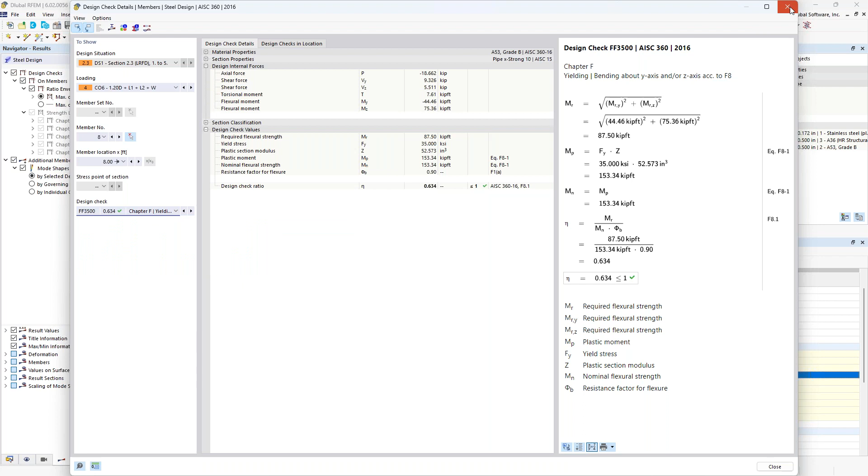And this is true for all of the various checks within this member. We can also scroll through to the various load combinations and so on. So the point is that we can design both the members and the surfaces within the same model in RFEM 6 with those available add-ons.

The final topic to discuss in the last few minutes is buckling. When we are performing a general static analysis, buckling is not necessarily considered. Now if you're running a second order or large deformation analysis, the program will give you an instability if you exceed the critical buckling load of either a surface or a member. But it's just a general instability without much more information. So how can we take structures such as this to evaluate buckling considerations?

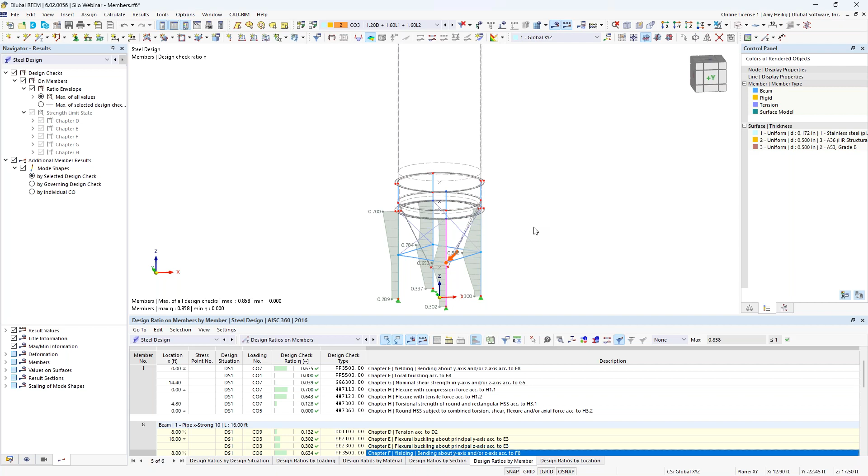Well, if you remember, I activated the structure stability add-on. So we'll go back to our load cases and combinations, and let's take a look at load combination number 3, for example. For any of the load cases or load combinations, we have this additional setting to activate the structure stability add-on. And I take a look at my default settings here.

This allows me to run this eigenvalue analysis and determine the number of eigenvalues that I have set. So you can see the default is 4 for this definition type. We have a second definition type set to 10, or I could just manually type in however many eigenvalues, 50, 100, however many I would like to calculate. Now for our example, we want to use this default 10 eigenvalues. So I go ahead and select it from my dropdown, and I'll immediately click calculate to just calculate load combination number 3 here.

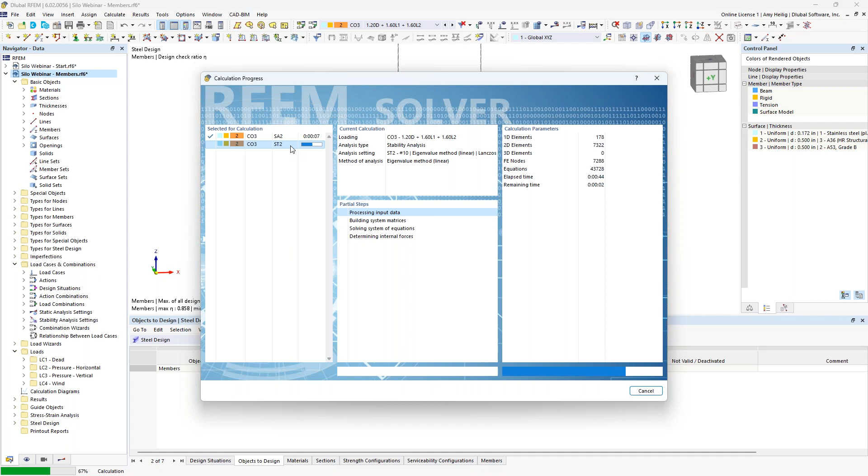So while this is running, I just want to quickly explain the benefit of this add-on and what's going on with the calculation right now. We have run the static analysis for load combination shown here in line 1, but line 2 is running that eigenvalue analysis. It's going to import all of the axial loads on the surfaces as well as the members. So you certainly want to choose a load combination that has the highest gravity loads, for example. And we're going to determine the 10 failure buckling modes of the structure along with the critical load factors. This will help us evaluate where we may potentially have issues with buckling in the structure.

Now that this is complete for load combination number 3, we can see here not only the static analysis, but also the stability analysis, with our 10 different eigenmodes that we solve for, as well as the mode shape shown graphically on a scale of 0 to 1.0. There are no magnitudes because it is an eigenvalue analysis.

But we see here in the table, here is our first failure mode. Essentially it looks like the racking of the entire structure with a critical load factor of 2.2. This just means the program can handle 2.2 times the loads from load combination number 3 before we would see a failure mode like this one.

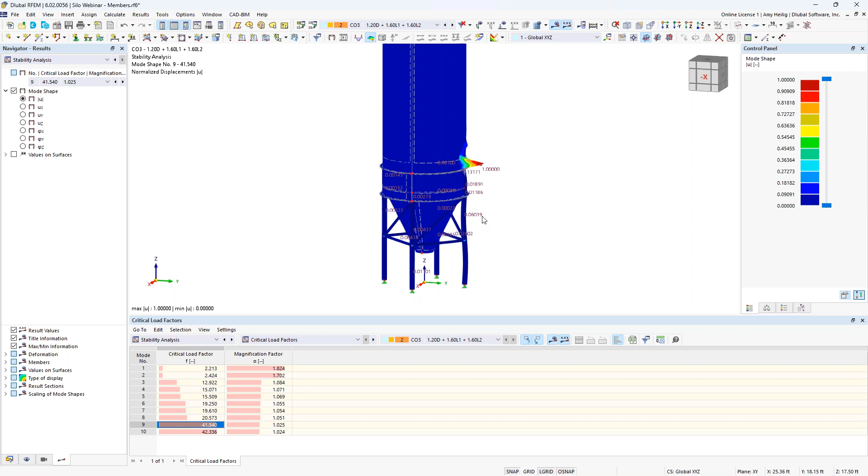If we take a look at the second failure mode, again it's more or less racking of the structure in the other direction. But then we start to see failure modes here, buckling of our column elements. If we continue scrolling down through these, eventually we get to mode shape number 9, where we start to see buckling of the shell elements themselves.

I can decrease the factor here so this isn't so overwhelming, but we can see the buckling here of the silo wall. Notice the critical load factor is 41.54, so this is extremely high.

We're certainly going to see failure of our columns, for example, before we'd see failure from buckling of the shell elements. If we have critical load factors down around 1.0, that's certainly a problem where we'd probably want to increase the member sizes or the thickness of the shell elements. Anything below 1.0 means the structure cannot even handle 100% of the loads from load combination number 3, so that's a major problem.

Some of these higher critical load factors are probably not so much a concern, but 2.2, 2.42, that's certainly lower and closer to that 1.0.

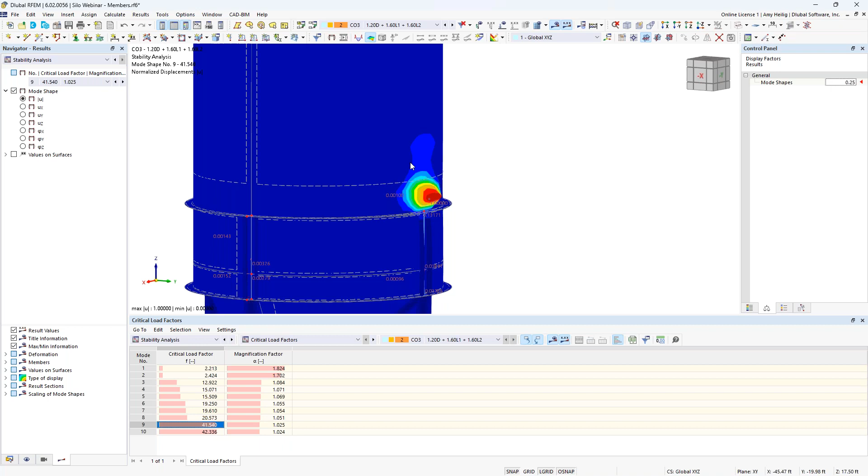We also have the ability in the program, with the imperfection options, to export this buckling mode shape to deform the FE mesh before continuing with the full static analysis. Imperfection options are available in RFEM 6, and we don't have time to show you that today, but if you're interested in how we can deform the mesh, which would show higher stresses after analysis at these locations, let us know and we'll send you more information.

Essentially, for buckling considerations, you would want to take advantage of the structure stability add-on as we've just seen. Okay, we will go back to the PowerPoint here to conclude our presentation today.